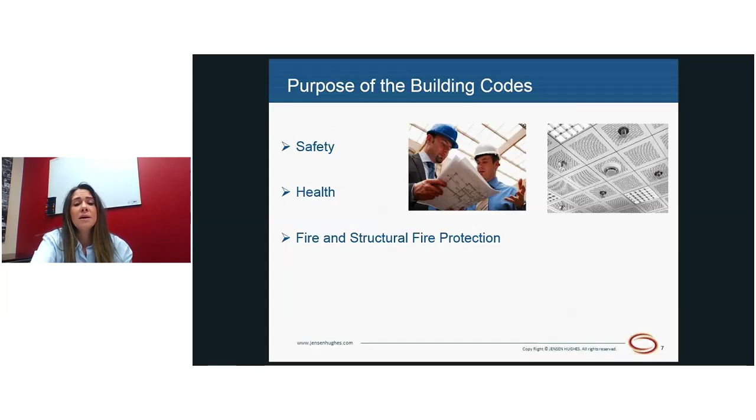Now, a little brief history of the building code. What is the purpose of a building code and why do we have it? Well, it allows us to build safe buildings, take into consideration the health of occupants within the buildings, as well as assist in the design of fire and structural safety and protection, as well as ensuring that the built environment is suitable for those with disabilities.

Now, a model code was desired to unify construction practices across Canada. Development of a national building code was first contemplated in Canada in the 1920s and abandoned due to the limited resources to complete the work. Originally, what Canada was doing, we were just using a number of codes that were derived from the United States.

However, an administrative committee formed in 1932, which was called the National Research Council of Canada, to actually develop the National Building Code. The development of the Canadian Model Code reinitiated in 1937. And in 1941, the first National Building Code was released. To date, we are on the 14th edition, which is now the 2015 National Building Code.

So, building code content. This seminar is going to mainly focus on Volume 1 of the 2015 National Building Code. I will be using the binder compendium, but there is also a book compendium. Throughout this, I will be referencing page numbers from the binder, which are also identical to that of the book version. So you will equally be able to follow along just as easily.

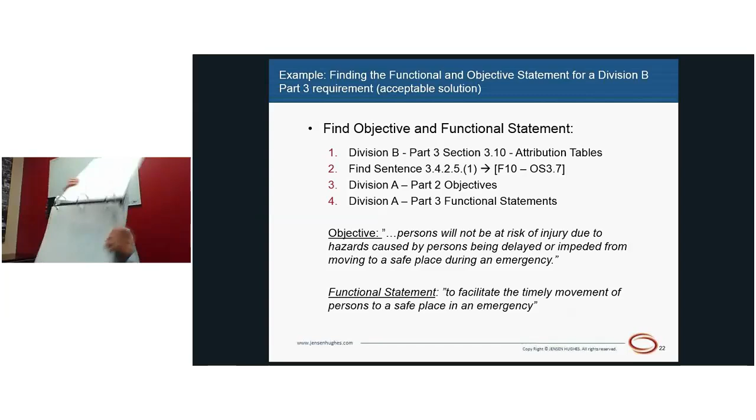Okay, so now we have our objective. We're going to flip to Part 3, just a couple pages over, to find our functional statement. This we can find on 3-2. Right at the top of the page, you will see a list of functional statements, one of those being F10, which reads: to facilitate the timely movement of persons to a safe place in an emergency.

Therefore, the intent of requirement 3.4.2.5.1 regarding travel distance is to ensure that people can make it to an exit facility in the event of an emergency in a timely manner, without being delayed or impeded.

So as a result, you're going to summarize that result and your testing and analysis criteria and data into a document and issue a statement stating that although you don't meet the literal application of the code, you do comply with the intent of the objective-based code. Therefore, this is deemed acceptable.

The results and documentation will be submitted to the AHJ and will await the acceptance or non-acceptance. Again, ultimately, you can do the same alternative solution over and over again. Sometimes it'll be accepted, sometimes it'll be rejected.

It is all up to the AHJ, so your authority having jurisdiction. It usually results in that person feeling that they're liable for that document or the repercussions of that document,

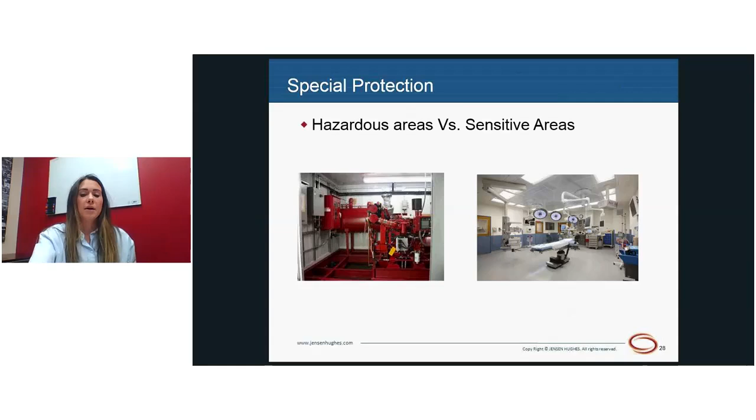We're going to look at special protection. What's the difference between hazardous areas, sensitive areas, when we're protecting people from the outside versus the inside? We're going to look at egress and exiting and what the difference between those two terms are.

We're going to be looking at interconnected floor spaces and mezzanines, as well as fire access routes and protection systems, high buildings and the additional safety measures applicable to high buildings. We're going to learn how to calculate occupant load and exit capacity and plumbing fixtures.

And then we're going to look at barrier-free design, which also includes the protection of floor areas and a barrier-free path of travel, otherwise known as areas of refuge. But first, we're going to look at a few definitions and concepts that are important as we move along.

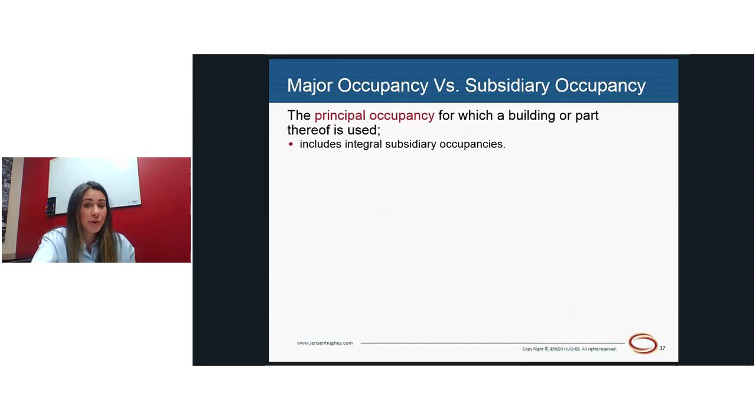So what is the difference between a major occupancy and a subsidiary occupancy? A major occupancy is the principal occupancy for which a building or part thereof is used. It can include smaller subsidiary occupancies.

So right now in this image, we have a 5-story Group C residential occupancy situated above one level of an F3 storage garage, otherwise known as a parkade. The storage garage is classified as a subsidiary occupancy to that of the overall Group C residential occupancy.

Now, if this parkade in the basement were to be open to the public and not just serving the residents above, it would become its own major occupancy as it's self-sufficient and doesn't rely on the major occupancy above.

Multiple major occupancies - that is where you can have multiple major occupancies within one floor area. You could have a Group E, a Group A2, and a Group B, but it all comes down to how we separate and compartmentalize those major occupancies within that floor level.

Multiple major occupancies can also be superimposed above one another. A few definitions that are quite important.

You need to know building height, which is the number of stories between the floor of the first story and the roof. What is the first story? That doesn't always mean it's the ground level. The definition of first story is the uppermost story having its floor level not more than 2 meters above grade. What is grade? Grade is the lowest of the average levels of finished ground adjoining each exterior wall of the building.

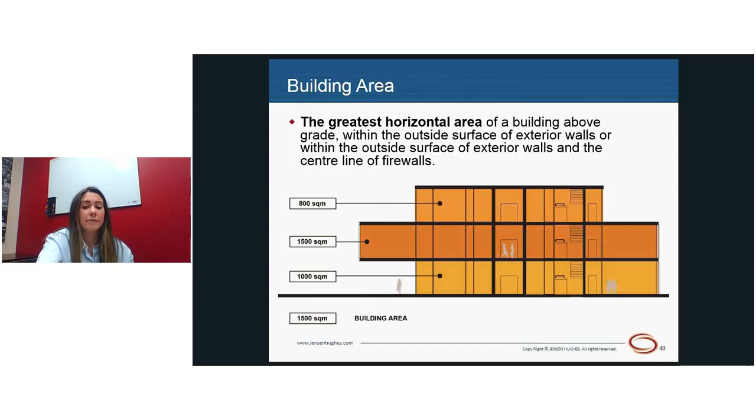As per the example below, you can see that the second story would be the one to designate as the overall building area. This image, again, is the first image, just simplified, in that the second floor area would be the determining factor for building area.

Now, I probably should have put this slide a little earlier, in that it does define the building classifications if you are unfamiliar with such terms. Now, building classifications are how you categorize the different types of buildings and their uses.

Any type of A occupancy is an assembly occupancy, and it serves the public. So whether that contains an arena, a performing arts theater, restaurants, or otherwise where occupancies can gather in an open air stadium, if you will.

Anything with a B is a detention occupancy, care and treatment occupancy, or a care occupancy. So B1, detention occupancy, is your jail establishment. Then you have B2, care and treatment, which would otherwise mean it's a hospital, somewhere that provides treatment to its patients or residents. And a B3 is a care occupancy.

So that means they might provide assistive living services, but they wouldn't provide treatment in-house. They would likely, in the event of an emergency, call an ambulance, and that ambulance would bring them then to a hospital where treatment could be provided.

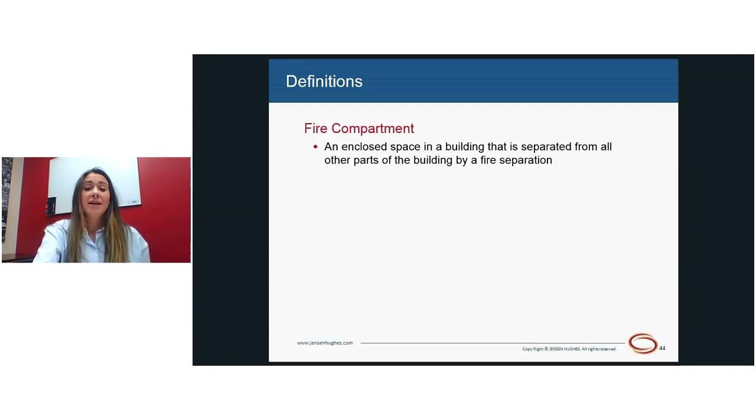Again, some more definitions which are important knowing for compartmentalization. What is a fire compartment? An enclosed space in a building that is separated from all other parts of the building by a fire separation. A fire separation is the construction assembly that acts as a barrier against the spread of smoke and fire.

Fire resistance rating: the time in minutes or hours that a material or assembly of materials will withstand the passage of heat and flame. Just because something has a fire resistance rating doesn't mean it has to be constructed as a fire separation.

Typically, the code's intent is to provide floor assemblies with fire separations that have a fire resistance rating. In a smaller building you'll have a lower fire resistance rating, and in a larger building a higher one. The reason is that the time allotted is based on how much time a firefighter or emergency personnel has within the building to get in and out before the floor assembly starts to disintegrate.

As a simple illustration, typically floor assemblies have a fire separation, and walls are fire separations when separating two compartments, whereas your supporting structure will just have a fire resistance rating. Sometimes, depending on your 3.2.2 article, you might have a waived fire resistance rating if your supporting structure is of non-combustible construction.

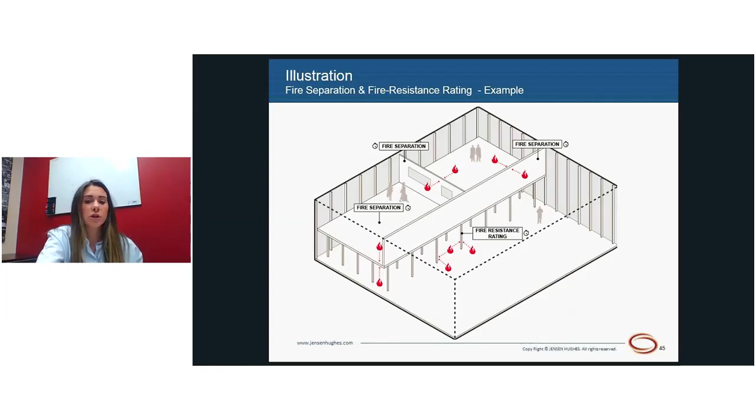Now we're going to vertically compartmentalize - floor assemblies, exit stair shafts, vertical shafts, elevators. There are factors that affect the degree to which a building is vertically compartmentalized. The major factors are: you need your major occupancy, you need to know your building area, and you need to know building height. With regards to firefighting and suppression, that's an added benefit.

Sometimes the client already knows if they want to sprinkler the building, which helps with insurance. Or if they don't know, you can use the three major criteria - major occupancy, building area, building height - find a 322 article, which will tell you whether or not you need the building to be sprinklered. The 322 article is found in subsection 322, Division B, Part 3 - 6th tab in your binder, or part 3 in your book.

Those will tell you all your construction requirements - whether you need combustible or non-combustible construction, whether you need to sprinkler the building or not, floor fire ratings, mezzanine fire ratings if applicable, roof fire ratings if applicable, and the fire resistance rating applicable to your structural components supporting those elements.

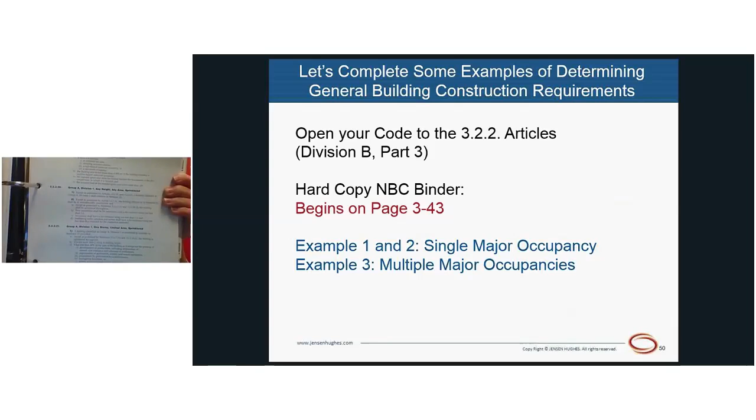Group A, Division 1, any height, any area, sprinklered - and those 322 articles lead you all the way to 32290 on page 3-68. So from page 43 to page 68, those are all your construction requirements for all types of major occupancies, ranging from assembly all the way to industrial hazard occupancies.

We're going to do two examples for a single major occupancy, then one large example of a multiple major occupancy, and then I've added one that you can do on your own.

So we have a single major occupancy, and the criteria is as follows: we have a Group C, the building area is 2,000 square meters, 5 stories in building height, and it is sprinklered.

The 322 article you're going to apply is 32248 - Group C, up to 6 stories, sprinklered. As you read through, you'll notice the building has to be of non-combustible construction. The floor assembly and supporting structure are permitted to have a 1-hour fire resistance rating.

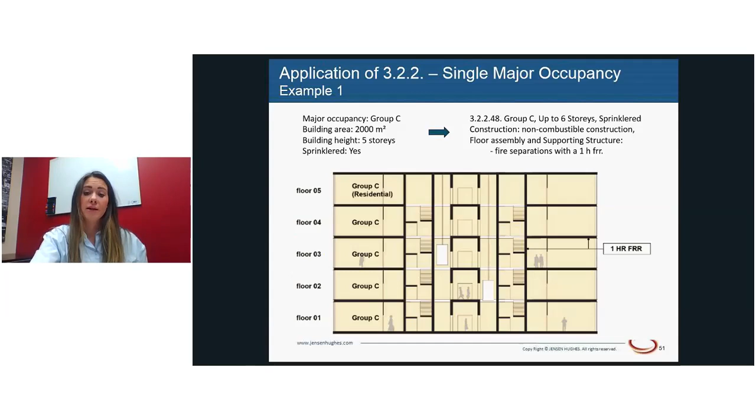Okay, so example 2. Our criteria is as follows: Group E, the building area is 1,500 square meters, building height 3 stories, it is sprinklered and faces one street.

So if we flip through, we're going to try and find our Group E requirements, and now we're just going to try and determine where that criteria falls in. You always want to go least restrictive to more restrictive.

In this case, the least restrictive 322 article is going to be 32267, Group E up to 3 stories sprinklered. Faces one street was just there to throw you off - typically you don't need that information unless your building's not sprinklered.

Anyways, the construction can be of combustible or non-combustible construction. The floor assemblies, no matter what, must be fire separations with a 45-minute fire resistance rating, whether combustible or non-combustible. However, your supporting structure may have a fire resistance rating of 45 minutes or be of non-combustible construction.

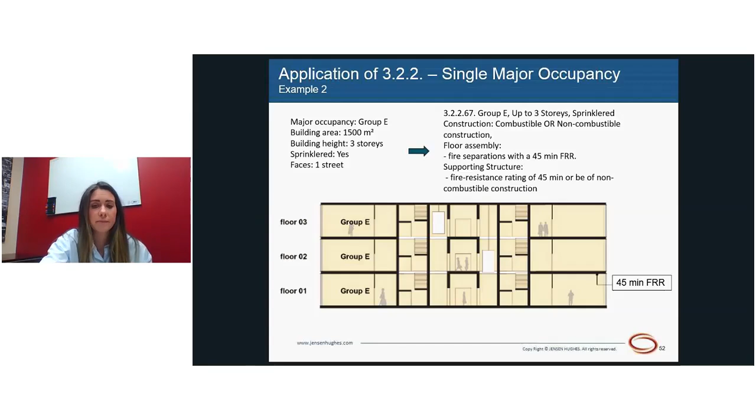Now we're going to do a multiple major occupancy example. If you look at articles 3225 to 3228, at the beginning of the 322 articles, it gives information on buildings with multiple major occupancies, superimposed major occupancies, and exceptions for major occupancies. In a building containing more than one major occupancy, the requirements of this subsection for the most restricted major occupancy contained shall apply to the whole building.

However, when you have superimposed major occupancies, where one major occupancy is located entirely above another, the requirements of this subsection for each portion of the building containing a major occupancy shall apply to that portion as if the entire building were of that major occupancy.

So this is just an exemplar for indicating superimposed major occupancies, in which case we could have a Group E, a D, a C, a B, an A — it doesn't matter. However, a lot of the time you want to put the more restrictive 322 article items

lower and then work your way up, so that you don't have all the restrictive requirements on the upper floor that then have to apply all the way down. You want the most restrictive requirements on the ground floor, and then as 322 article restrictions lessen, you can build up.

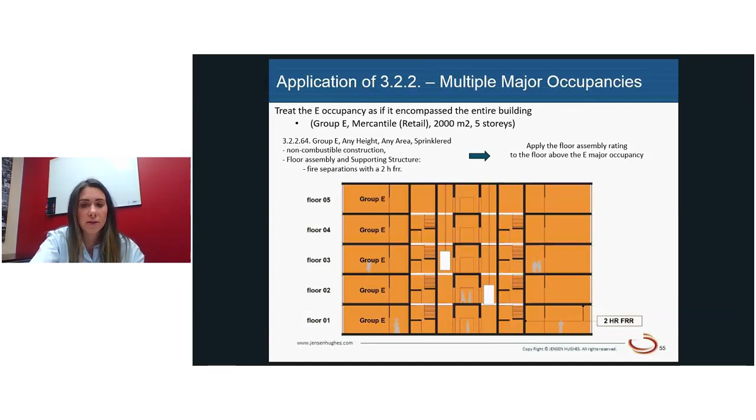Secondly, we're going to move on to floors 2 and 3, which consist of a Group B occupancy. So now we're going to treat the entire building as if it was that occupancy — 5 stories, 2,000 square meters, only containing that group.

You're going to flip to your 322 articles and find your item, in which case we come up with 32257, Group B, up to 6 stories and sprinklered.

That means your building is going to maintain non-combustible construction. Your floor assembly and supporting structure will have a 1-hour fire resistance rating. Like we did before, we're going to apply that floor assembly rating to the floor above the Group B major occupancy, creating more compartments separated from the remainder of the building. And it's always the floor above.

Now we're going to do the last 2 stories, which is Group C, stories 4 and 5. We're going to treat the entire building as a 5-story residential building and try to find the 322 article.

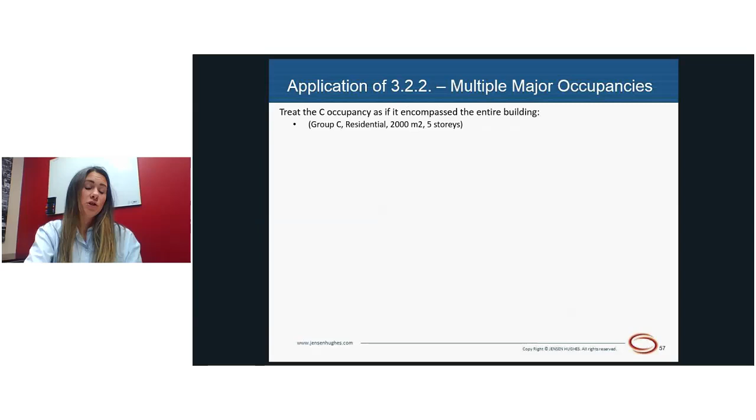In this case, we come up with 3.2.2.48, non-combustible construction, floor assemblies required to be of fire separation with 1 hour fire resistance ratings. Again, we want to apply that floor assembly rating to the floors above the Group C. Now you'll notice that the floor above the 4th floor is 1 hour, but we've applied

a 0 hour fire resistance rating to the roof. Why? Well, under 3.2.2.17 and 3.2.5.12, sentence 6, sprinklers are permitted to be used in lieu of a roof rating for assembly occupancies consisting of an arena, pool, or gymnasium. However, in the explanatory material of 3.2.5.12, sentence 6, through permission of the authority having jurisdiction, this could also be

used on alternate building occupancies. In real life applications, it is almost always accepted to waive the fire resistance rating of a roof if you have a sprinkler system, provided the rooftop is not an occupied space, not being used as an amenity, terrace, etc. Otherwise, per literal application of the code, the roof would require a 1 hour fire resistance rating.

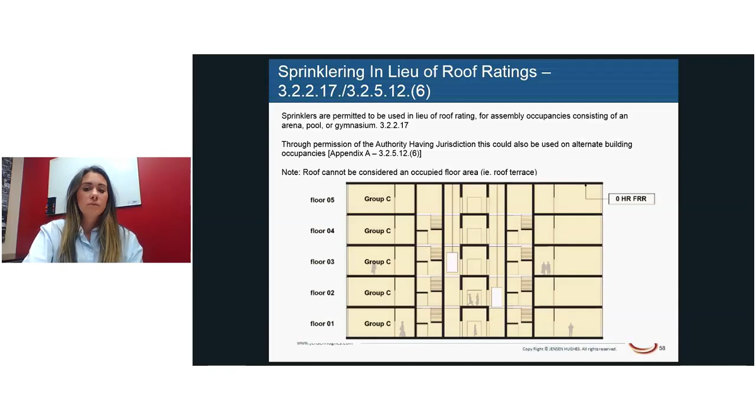Okay, so now when you put the whole thing together, we'll have the floor assembly above floor 1 having a 2 hour rating, and then all other floor assemblies will be 1 hour. Because the building is sprinklered, we assume the roof isn't being occupied or being used as a rooftop amenity space, but we can waive the fire resistance rating. That's it.

Now, once we've vertically compartmentalized, we can look at the exit shafts, the elevator shafts, and the service shafts, which are all based on your floor assembly rating. So in this case, say the entire building was classified as a Group E major occupancy. That means each floor assembly would have a 2 hour fire resistance rating.

If we look up exits, 3.4.4.1, I won't do all of them, but I'll go through 2 of them with you. So under 3.4.4.1, if I get there - fire resistance rating of exit separations, page 3-134. It says, every exit shall be separated from the remainder of the building by a fire separation having a fire resistance rating not less than that required by your subsection 3.2.2 article, but not less than 45 minutes.

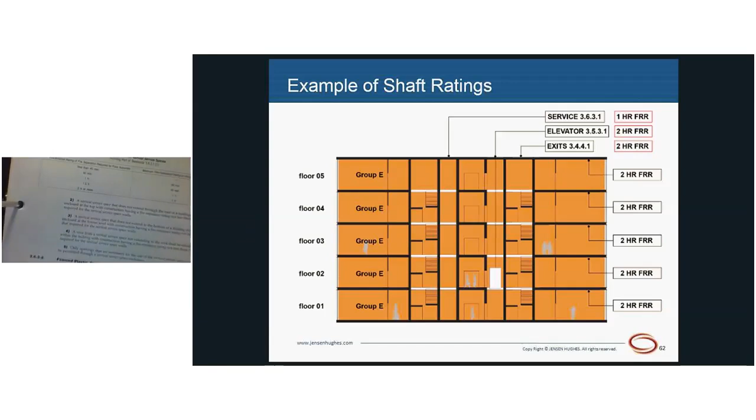And you'll notice fire resistance rating of fire separation required for the floor assembly, right there, you see 2 hours right at the bottom. You follow your hand over, and the minimum fire resistance rating of that vertical service space is required to be 1 hour. So you actually get a bit of a reduction there.

Now, something that comes up as a question quite often is that based on your 3.2.2 article, if you notice that the lower floors are not required to be sprinklered and the upper floor is required to be sprinklered, this would result in each of the floors below the sprinklered floor level having to be sprinklered as well.

Or say you had 1 hour, 1 hour, 1 hour, and then 2 hour floor fire separation, your exit stair shafts all the way down would also be 2 hours. Except that your floor assemblies could remain 1 hour, 1 hour. It's just that your 2 hour floor assembly must now be the same as your 2 hour exit stair shaft all the way down, because firefighters need to be able to come up, remain protected for that 2 hour period from the top level, which requires that more restricted fire resistance rating.

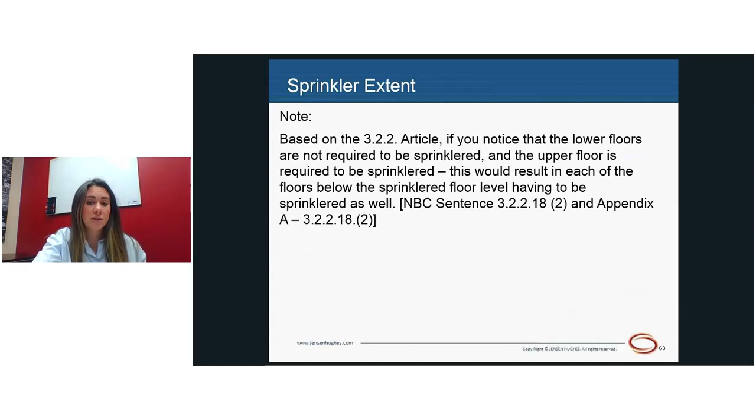It's a 3-story Group E office situated above 1 basement level below grade, otherwise known as a parkade, Group F3 occupancy. Now I'm going to go through the answers with you because there is an item that might throw you for a bit of a loop.

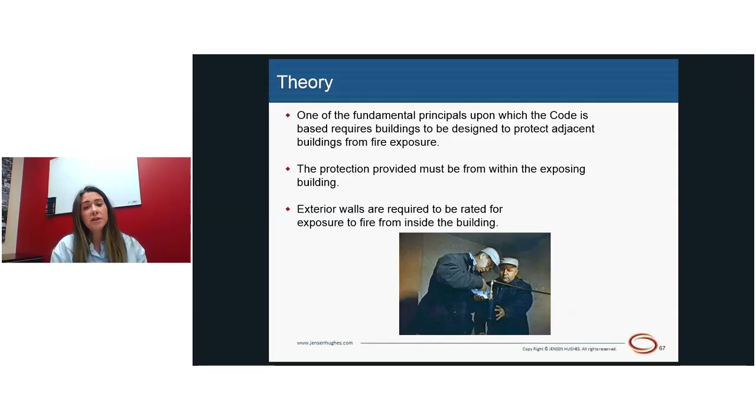So what is the theory behind spatial protection and exposure protection requirements? Well, one of the fundamental principles upon which the code is based requires buildings to be designed to protect adjacent buildings from fire exposure. The protection provided must be from within the exposing building. Exterior walls are required to be rated for exposure to fire from inside the building. So if a fire breaks out in one building, you need to make sure that it's not going to have an impact on adjacent properties.

The history behind this is that in 1958, the town of Aultsville, Ontario was permanently flooded as part of the creation of the St. Lawrence Seaway. After the town was abandoned, the vacant buildings were burned to study how a fire in one building affects the adjacent buildings. These fires are known as the St. Lawrence burns.

What is an unprotected opening? That is a doorway or a window or an opening, other than one equipped with a closure having a required fire protective rating, or any part of the wall that has a fire resistance rating less than required for the exposing building face. In other words, if you have a doorway, window, or opening that's not protected, that is considered an unprotected opening. If you have a closure, such as a fire shutter over an opening, that's no longer in your area of unprotected openings as it's protected by a closure.

The unprotected opening limit tables in subsection 323 are based on the results of the St. Lawrence burns. The maximum permitted unprotected openings can be determined on the basis of the following information: you need the occupancy classification, the exposing building face and the area of the fire compartment you're calculating, and you need to determine the limiting distance to a property line or the center line of a public thoroughfare.

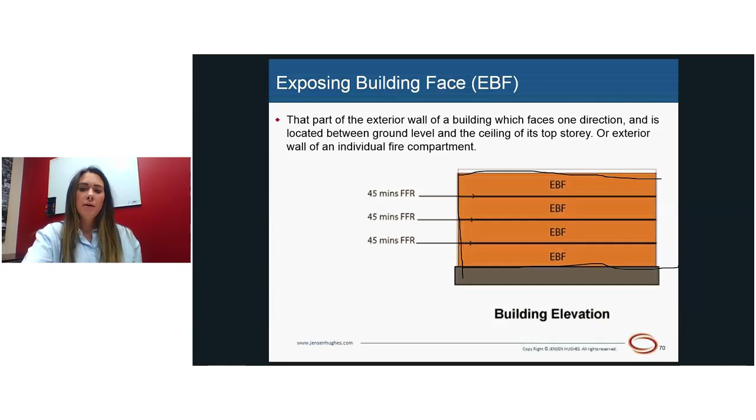So you have the option to either calculate exposing building face using... sorry, this isn't working, one second. You can either use the area of the entire exposing building face, okay? A beautiful square I just drew.

Or, where a building is divided into fire compartments with a minimum fire separation having a fire resistance rating not less than 45 minutes, then you can actually calculate the required percentage of unprotected openings per compartment. And that can actually help you have more unprotected openings in your overall exposing building face.

Now, the distance from an exposing building face to a property line can also be measured to the center line of a street, lane, or public thoroughfare, or an imaginary line between two buildings or fire compartments on the same property, measured at right angles to the exposing building face.

So if I have building Y and building X separated by a property line, you would measure from the closest portion of the exposing building face to the property line. And you would do the same thing for building X, closest portion of the building to the property line. And it's as easy as that.

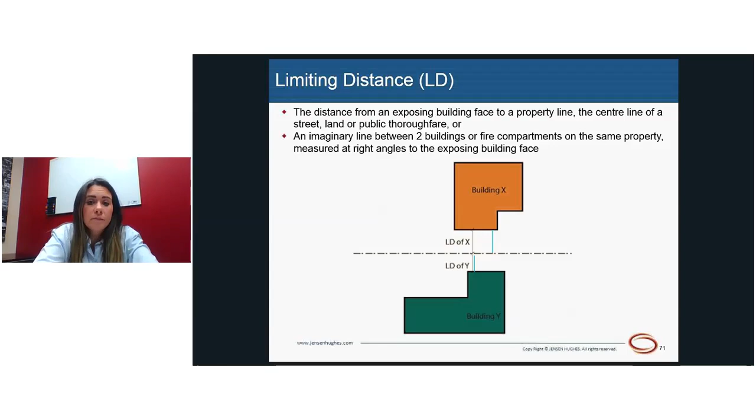Now, construction of exterior walls. Unprotected openings permitted or required construction of exterior building face can be determined based on separate limiting distance calculations. So, for instance, this yellow dotted line right here is what you would use to determine the fire resistance rating required of your exposing building face.

So this is one compartment, okay? So you would take the limiting distance from the closest face of that compartment to the property line, and that's going to be your limiting distance to determine the fire resistance rating of this compartment. You would take this dimension, okay, this dimension.

Depending on your municipality, some like you to measure from center line to center line, so center wall to center wall. Other municipalities prefer that you use from inside of compartment to inside of compartment. So it's always nice to ask who you're dealing with at the city as to what they prefer for your calculations, so that way you don't have to go back and redo them.

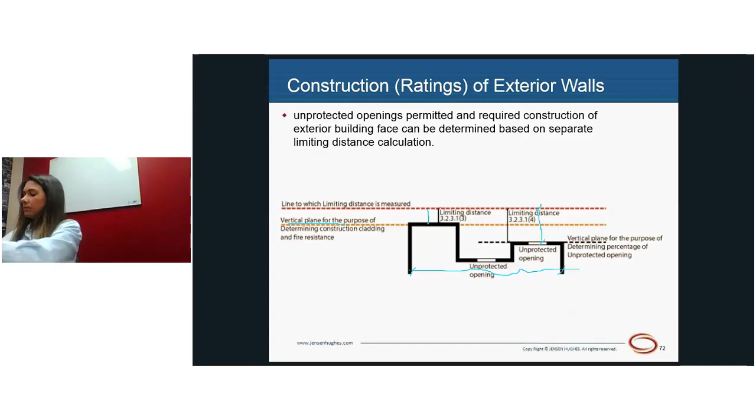So that is enough criteria to get you going on how to determine your exposing building face construction as well as your percentage of unprotected openings. Because the building's sprinklered, that immediately means you get to look at either table 3231B or table 3231E, on page 3-75. You'll notice in the first line of the table, it will tell you what occupancies each table applies to. So table 3231B applies to unprotected openings for group A, B, C, D, and F3 occupancies.

As we stated, the criteria for the building we're working on, it's an F2, so we're not going to be using 3231B. We're going to be moving down to table 3231E, which applies to groups E, F1, and F2 buildings. Now we have a 90 square meter exposing building face, so we're in between the 80 and 100 mark. And then we have a limiting distance of 4.5 meters, which is in between the 4 and the 5. So we are going to have to do some interpolating.

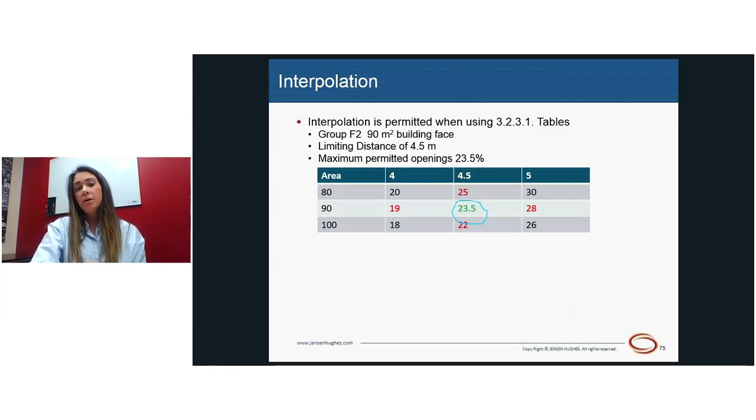If you look at 3.2.3.10.2, it permits 100% unprotected openings where the limiting distance is 9 meters, regardless of occupancy classification or sprinklering. If you look at tables 3.2.3.1D and 3.2.3.1E, you'll notice that as your limiting distance grows larger, you're permitted almost 100% unprotected openings. For group A, B, C, D, and F3 occupancies, any limiting distance beyond 9 meters permits 100% unprotected openings. For group E, F1, and F2 occupancies, anything past 15 meters is essentially permitted 100% unprotected openings.

But in this 3.2.3.10 sentence 2 item, if you're on the ground floor level and you have a limiting distance of 9 meters, you're permitted 100% unprotected openings no matter what. It actually reads: the exposing building face of a story that faces a street and is at the same level as the street is permitted to have unlimited unprotected openings if the limiting distance is not less than 9 meters. So yes, that's correct. It's typically the ground floor level or the floor level that opens onto the street that's permitted 100% unprotected openings.

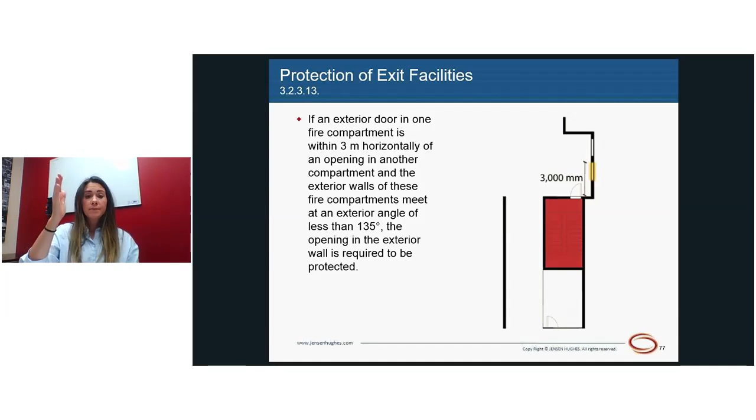What about protection of exit facilities? When you have an exit leading outside, and there's an opening located within 3 meters of that exit, and that opening in the adjacent wall meets at an exterior angle of less than 135 degrees, the opening in the exterior wall has to be protected. Because if you're exiting a building and there's a fire in the adjacent compartment, an opening within 3 meters could impact individuals trying to escape the building safely. Therefore, that window within 3 meters is going to be protected.

How do you protect an opening? You can use glass block, wired glass, or a fire shutter. The NBC does not have a literal requirement regarding a sprinkler protected glazed wall assembly. However, you could use it, but you may require an alternative solution or variance approved first by your authority having jurisdiction. If you're working on projects in Ontario, the Ontario Building Code has Article 3.1.8.18, which speaks to the requirements of a sprinkler protected glazed wall assembly, which is permitted. However, in other provinces or under the National Building Code, you would require a variance or alternative solution to use a sprinkler glazed wall assembly.

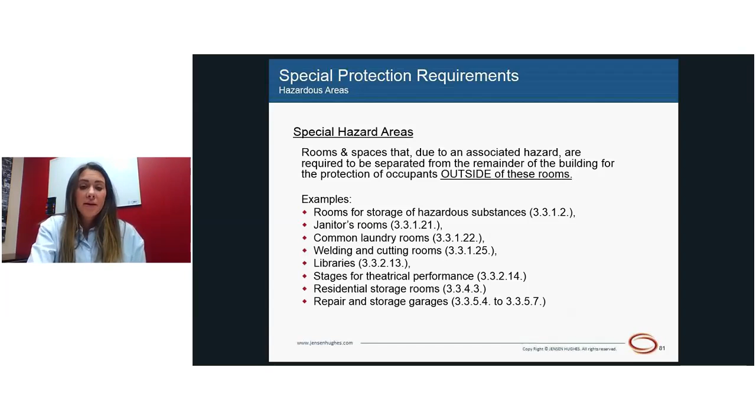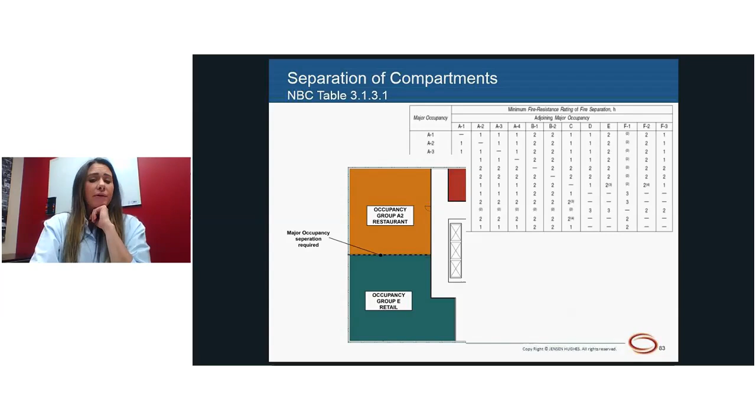Separation of compartments. A great table to use if you're ever trying to determine the fire separation between major occupancy is NBC table 3.1.3.1. For example, if you have a restaurant located next to their neighbor, which is a retail space, you go to this table, look at A2E, and you'll realize that the fire separation separating these two compartments must be not less than 2 hours.

Let's do another example. We have a floor area with multiple office spaces within it. You look at your table 3.1.3.1, B, and you need nothing. Essentially, no fire separation required.

This is also confirmed under section 3.3, where all your horizontal compartmentalization requirements are found. In sentence 3.3.1.1, it confirms that group B occupancies placed side by side are not required to be separated from each other by a fire separation or having a fire resistance rating. You can just have plain drywall, partition walls, not smoke sealed, nothing.

Public corridors. A lot of the requirements you can find in 3.3.1.9. They are required to be 1100 millimeters wide, provide access to 2 exits in 2 separate directions, permitted to have 100 millimeter obstructions on either side, and dead-end corridors are not permitted to exceed 6 meters unless located entirely within a suite.

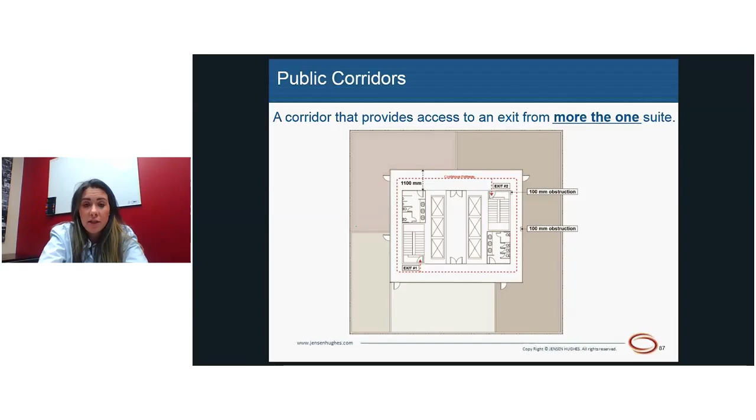Corridors used by the public can serve one tenant. Why would one tenant have a corridor used by the public when they can just access and exit directly? Typically, a client or an owner wants this option because it provides security, so anyone coming up through the elevator lobby doesn't just wander right into their office space, or if they don't meet travel distance to an exit from within their space. I'm going to get into how you apply that requirement and where it's found in the next few slides.

If we go to 3.3.1.9, sentence 7, a dead-end corridor is permitted provided it is not more than 6 meters long. Right then and there, not permitted. However, if that dead end was less than 6 meters, it would be permitted.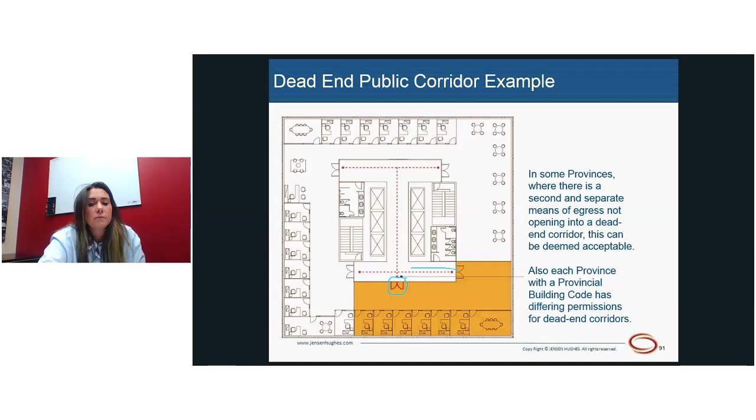Public corridors. Section 3.3.1.4—this is where you find all of your public corridor fire separations. We'll start with sentence 1, the generic requirement, which reads: a public corridor shall be separated from the remainder of the story by a fire separation having a 45-minute fire resistance rating.

So a public corridor constructed has a 45-minute fire resistance rating. Pretend this is a high-rise office building, in which case the exit stairs and elevator shafts would have to be separated from the remainder of the floor area by a 2-hour fire resistance rating no matter what, as we learned from our 3.2.2 articles on vertical compartmentalization. But for public corridors within the horizontal floor area, we require a minimum 45-minute fire resistance rating.

Hold on, we are getting to those exceptions in a second. Where the entire floor is sprinklered, public corridors do not require a fire resistance rating. This is mentioned in sentence 3: if a story is sprinklered throughout, no fire resistance rating is required for fire separation between a public corridor and the remainder of the story, provided the corridor does not serve a care, treatment, or detention occupancy, or a residential occupancy.

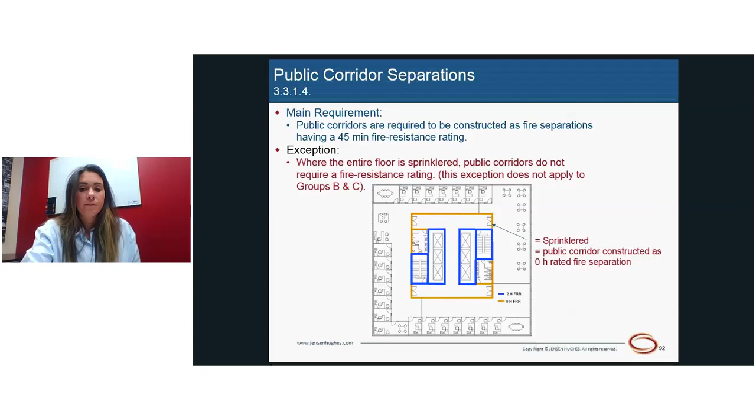Then we get into our exceptions listed in sentence 4. This one's the fun one. Where the entire floor is sprinklered and travel distance from all points of the floor to an exit is less than 45 meters, the public corridor does not require a fire separation. So if you comply with travel distance and your building is sprinklered, your public corridor can now just consist of a simple partition wall, no fire separation, no fire resistance rating. But again, your stairs and elevator shafts would still maintain their fire resistance and fire separation from the remainder of the building.

There's also another exception allocated in 4(c) that just states if you have base building washrooms, or washrooms facing the public corridor, they don't need to be separated from the corridor, provided the remainder of the corridor is separated from the remainder of the floor.

Okay, now we're going to move into egress and exiting. What's the difference? The easiest way to explain this is that an egress door provides access to an exit from a floor area. We're not yet outside the building, not yet in a safe haven away from the fire. We're still within the building, but en route to an exit.

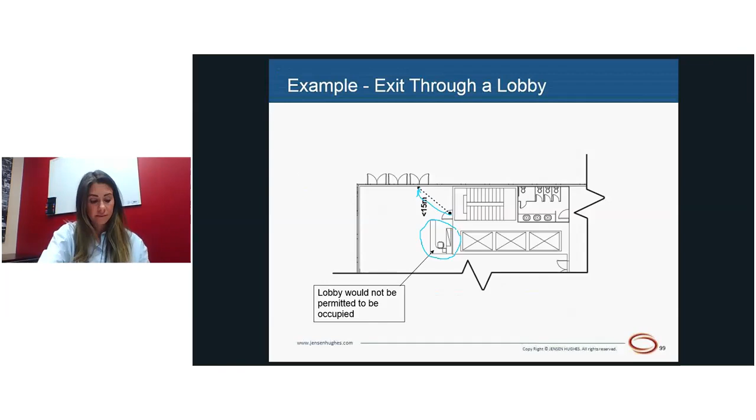Doors and door hardware. So doors are required to have a clear opening width depending on what occupancy they serve. Doors serving a room or suite having more than 60 people are required to swing in the direction of exit travel. They are not required to swing in the direction of exit travel if your occupant load is less than 60. Panic hardware required where doors serve an assembly occupancy with an occupant load more than 100.

Sliding doors must have a breakaway feature when opening into a public corridor or used as an egress door in an access to exit. A question came up as to what breakaway feature was, and I'm just going to refer you to the actual requirement and read it to you. So requirements for doors are actually found in 3.3 as part of a means of egress.

And it reads, under 3.3.1.12 sliding doors, at the bottom of page 3.109, it states that a sliding door provided in locations described in 3.3.1.11, so serving rooms or suites with more than 60 people or larger occupant loads or opening into a public corridor, etc., must be designed and installed to swing on the vertical axis in the direction of travel to the exit when pressure is applied, and be identified as a swinging door by means of a label or decal affixed to it.

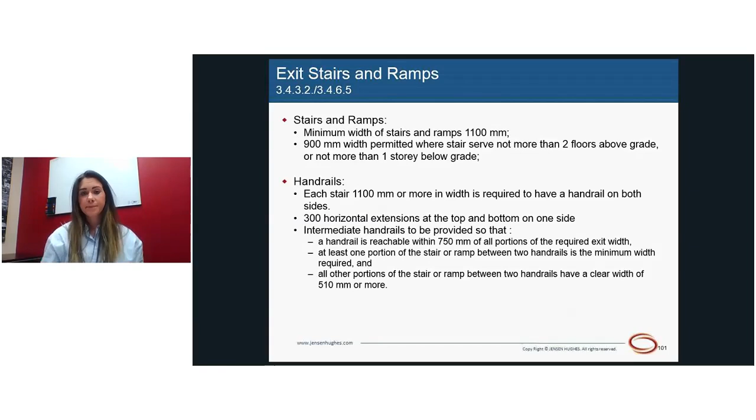Guards are required along stairs and ramps. If you don't have walls supporting either side, or walls that are at least 1070 millimeters high, you will require a guard or other barrier that is 1070 millimeters high that extends along the entire stairway and landing.

It used to be that guards could actually be lowered to suit the height of a handrail along a stairway. But as of the 2015 NBC, guards now have to be at least 1070 millimeters high along the entire stairway and the entire landing.

Now guards must make sure that a sphere having a diameter more than 100 millimeters can't pass through. A lot of the time you just space picket the 100 millimeters on center to ensure that the 100 millimeter diameter sphere can't pass through.

Now, they also cannot facilitate climbing, so the only horizontal components you can have within a guard are going to be less than 140 millimeters from the finished floor level, stair surface, or ramp surface, or 900 millimeters above the finished floor level, ramp, or stair surface.

Stairs have specific requirements for rise and run, and that can all be found in Article 3.4.6.8. When constructed, you can have up to 5 to 10 millimeters in construction tolerances.

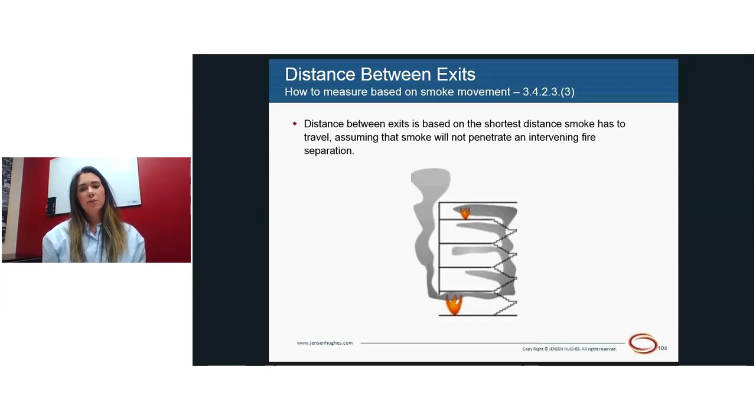Now we're going to move into distance between exits. Distance between exits is based on the shortest distance smoke has to travel, assuming that smoke will not penetrate an intervening fire separation.

So if we move to 3423, which is found at the bottom of page 3130, there's 4 sentences. So there's a couple options on designing for distance between exits.

We're going to start with 1A and B. 1A is that if you have a public corridor, the distance between exits is required to be at least 9 meters when served by a public corridor. In which case, if I did the diagonal dimension of this floor, say it was 20 meters, divided by 2, I got 10 meters, then the distance between exits could be 9 meters. So it could be reduced by a meter, if you will.

However, if you were to take the maximum diagonal dimension, which was like 8 meters, very small, divided by 2, gets you 4 meters. Those exits still can't be spaced apart any less than 9 meters.

As for B, if a floor area does not have a public corridor, then you need to take the maximum dimension of the floor area and divide it by 2, and the result of that is going to be your distance between your exits. Now, we elaborated a little bit in this image in that the smoke travel was measured around tables, etc.

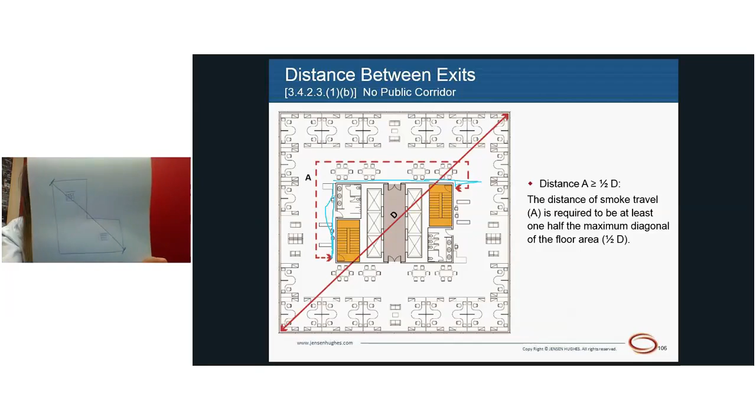So, say we have a floor area that's L-shaped, no public corridor. Distance between exits, how do you measure? You would measure from the furthest corner to the opposing furthest corner, whether or not that distance leaves the building. You would then divide that by 2, and that is the distance these exits would need to be spaced apart. If there was a public corridor joining these 2 exits, it would just have to be spaced such that the distance is not less than 9 meters per sentence 1A.

There was a new one that came into play, which is sentence 4. The distance between 2 exterior discharges of exit stairs serving the same floor shall be not less than 9 meters apart, or not less than 6 meters apart if the building is sprinklered, and the 2 exterior discharges are located within 15 meters of a street. In this case, say I have an office building, a residential building, any type of building, and sometimes what architects will do is have exit stairs placed in close proximity, or not in close proximity, but then route them to exit side by side out the side of a building. Based on this new requirement, such a design would no longer be permitted, because the distance between the 2 exterior discharges would have to be greater than 9 meters or greater than 6 meters, depending on those conditions.

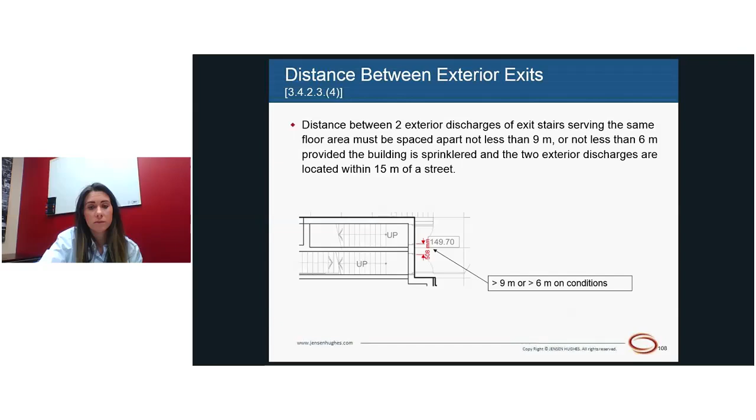Travel distance. The travel distance requirements, I believe, on the next page, 3-131, are outlined in 3424 and 3425. The distance from any point in a floor area to an exit is measured along the path of exit travel.

So, a sprinklered floor area is subject to a travel distance of 45 meters. High hazard industrial occupancy is limited to 25 meters to an exit. A group D that's not sprinklered is reduced from 45 to 40 meters. Other unsprinklered occupancies are limited to 30 meters. However, a storage garage conforming to 32290, which I believe is an open air storage garage, can have a maximum travel distance of 60 meters.

So how do you measure travel distance? I typically will only measure travel distance in a building code review if I'm provided with a furniture or equipment layout plan. That's because then I can measure travel distance around the furniture to an exit to determine whether or not the travel distance is actually going to comply.

If a client provides you with a drawing that has no furniture or equipment layout, then you have to measure the most restrictive travel distance, which is around walls, hugging walls, within almost a meter of them. In which case, you can extend your travel distance quite quickly by doing that. So you'd essentially be telling the client that they don't comply with travel distance, when in fact, once they have their furniture and equipment layout, they could comply. It is just very helpful to have that criteria on the plan already versus backtracking.

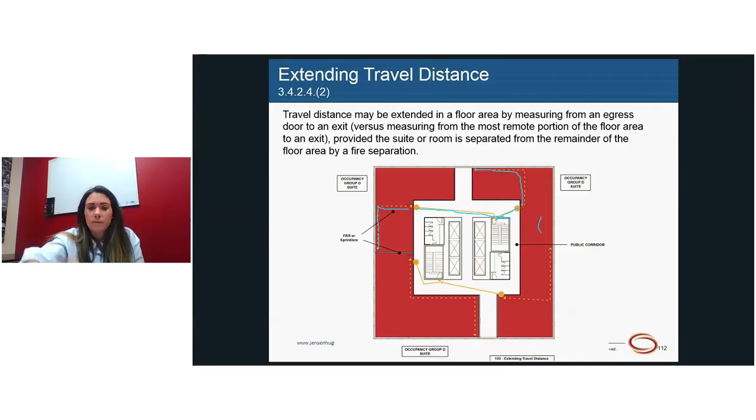Alternatives to travel distance. So you don't have to comply with the requirements of 3.4.2.5.1, provided exits are spaced along the perimeter of the building not more than 60 meters apart, and that each main aisle within the facility leads directly to an exit.

Okay, so you're almost creating a grid-like system. All main aisles, primary aisle width, primary exit paths of travel, align with an exterior door placed not more than 60 meters apart from each other.

A lot of the time, this type of travel distance is met in large industrial buildings or large storage buildings, sometimes even large retail stores like Walmart. What they'll do is provide a grid-like system, so whenever you're on a main pathway, it will lead directly to an exit door. Because from within the middle of those buildings, sometimes they're so large that you cannot make it to an exit within 45 meters.

So egress from suite. Now we've talked about exiting, minimum number of exits, distance between exits. Now we're going to do the requirements for the minimum number of egress doors from a suite or room. Provided all the following conditions are met, a suite is permitted to be served by a single egress door if the area of the suite does not exceed table 3.3.1.5.A and B.

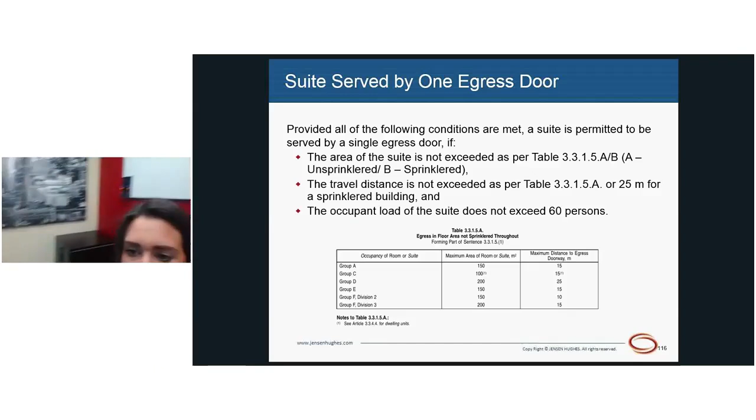So I am right now sitting in a meeting room. Okay? I'll give you a little tour. Right? To my left is a single egress doorway. Okay?

This meeting room is not sprinklered. I'm in a little industrial building. I'm a group D, less than 200 square meters, less than 25 meters to that single point of egress, and less than 60 people. I think there's only enough chairs in here for 10 people. Which means this room I'm in is served by an adequate number of means of egress.

It also swings inward, which is permitted because the occupant load is less than 60 people. Okay, let's do some more examples.

Is this suite permitted to be served by a single means of egress? So we've got a travel distance that's less than 25 meters, actual 15. The group D office, not sprinklered, 150 square meters, there's only 16 people.

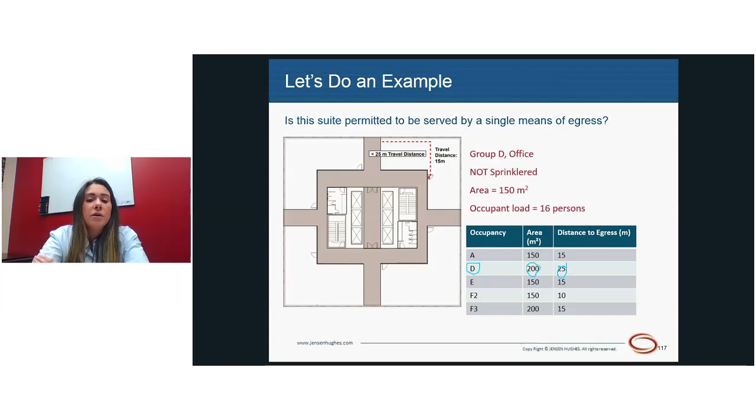Again, group D, we're less than 200, 15-meter travel distance, which is less than 25. Therefore, a single egress door is permitted.

Two means of egress: a suite is required to be served by at least 2 means of egress if the suite consists of an F1 occupancy, so your high hazard industrial occupancy, and the occupant load exceeds 60 persons. For an unsprinklered building, the area of the suite or the travel distance exceeds that of 3315A. For a sprinklered building, the travel distance exceeds 25 meters, or the area as allocated in 3315B.

So we've got an example here. We have a travel distance that's greater than 25 meters, actual 35, to any egress door. Group D office, sprinklered, 150 square meters, and there's 50 people in the space.

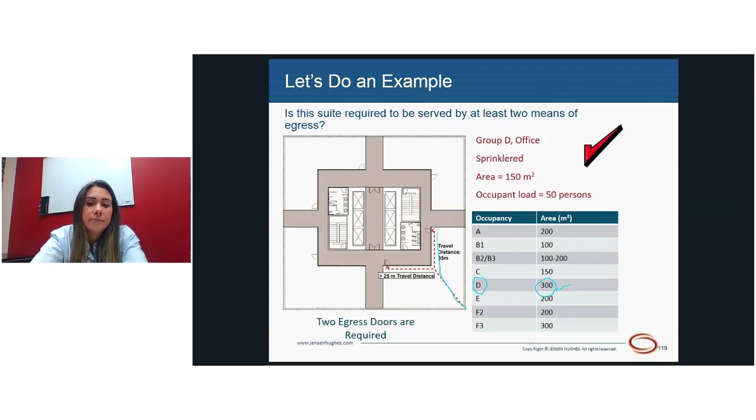So we look at 3315B. We've got a D occupancy. We are less than 300 square meters. We are less than 60 people, but we have a travel distance of 35 meters to one of the 2 means of egress. Therefore, 2 means of egress are required. So just to reiterate...

Say we have a sprinklered building, group D, single egress. Here are the options. We need 25 meters to the single means of egress from within the room or suite. But we also need an overall 45-meter travel distance to an exit.

Now, if the suite is separated from the corridor, you can measure 25 meters to the egress door and an additional 45 meters starting from the egress door to the exit. If there were 2 means of egress, you could have 45 meters measured to the single egress door, and then 45 meters re-begin at the egress door and end at the exit stair door.

So we've talked about distance between exits, and we've been talking about egress doors. So now it would only be fair to discuss distance between egress doors. When you have a room or suite required to be served by two means of egress, those two means of egress need to be separated by 1/3 the maximum diagonal dimension of the suite.

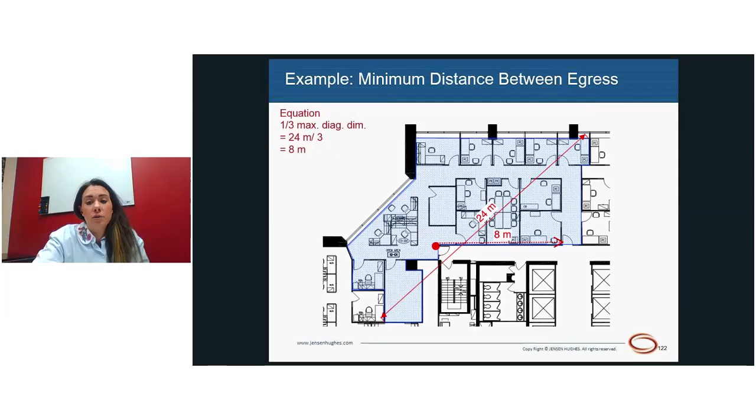What happens if the doors are spaced closer than 8 meters apart? What we typically do is construct walls of 0-hour rated fire separation so that the egress doors are separated such that smoke will travel around the walls constructed as smoke separations to achieve the distance between the two egress. A lot of the time this becomes apparent and required when you have a large suite at the end of a corridor in a corner unit with two egress doors, one on this side and one on this side. So you'll actually create a fire separation along walls between those two doors.

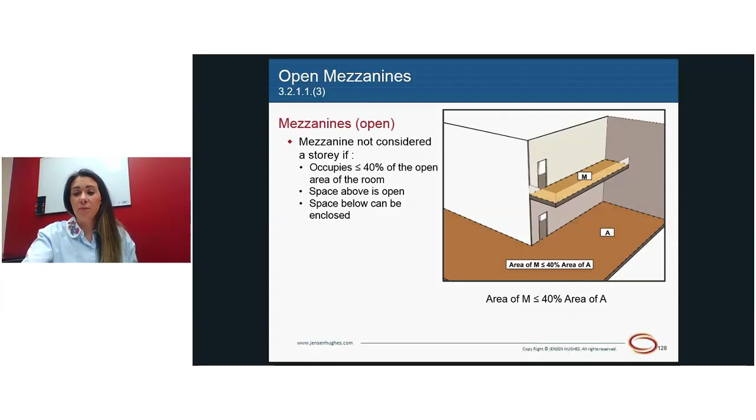The open option is discussed in 3211, sentence 3. In that, a mezzanine is permitted to remain open provided it occupies less than or equal to 40% of the open area of the room in which it's located. The space above remains open, but spaces below it can be enclosed. Once you enclose areas below the mezzanine, you have to subtract that from the open area of the room in which it's located, because the 40% has to be the open area of the room. So any enclosed rooms within that floor area must be subtracted because it's not the open area of the room.

So now, an enclosed mezzanine - if you don't comply with the requirements of an open mezzanine, we move into sentence 4. This permits you to have an enclosed mezzanine. However, it can't be more than 10% of the floor area of the story in which it's located, so you don't have to reduce those enclosed areas as you would for a 40% open mezzanine. The space can be fully enclosed and there's no requirement for visual communication.

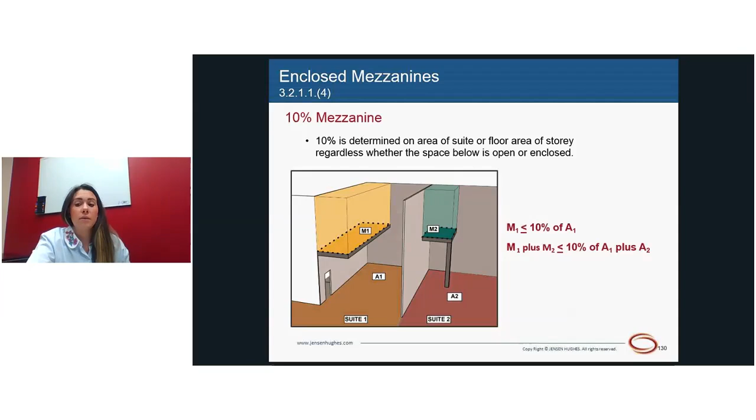Okay, so this is the same thing, but a second example of an enclosed mezzanine. Again, you can have one mezzanine that's enclosed, which is less than 10% of the floor area of the story in which it is located. However, if that floor area or story is divided into rooms and suites, and you want additional enclosed mezzanines, each mezzanine within a room or suite is not permitted to be greater than 10% of the floor area of the room or suite in which it's located. And the aggregate area - so if you have multiples, now I have two - the aggregate area of these two combined must be not more than 10% of the total floor area of the story in which it's located.

And then there's a third option, which is covered under 3.2.2 or 3.2.1.1, sentence 7. So we can go back to the option we discussed at number 1 with an open mezzanine, the 40% open mezzanine. However, on that 40% open mezzanine, I can have a 10% enclosure, which is not more than 10% of the floor area in which it's open to. So we have a 40% mezzanine - 40% of the open area in which it's located - and then on top of that 40% mezzanine, we can enclose a portion which is not more than 10% of the floor area or the open floor area in which it's located. You're not going to have 40% and then another 10% to make 50 - that's not the case. It has to be within the 40% open mezzanine.

However, here in Alberta, Calgary, the city has a very weird interpretation in that the enclosure can only be 10% of the size of the 40% mezzanine. That's not the case. The literal application of the code states that you have a 40% mezzanine, which is 40% of the open area of the room in which it's located, and then on that 40% mezzanine, you can have an enclosure that is not more than 10% of the open area of the room in which it's located.

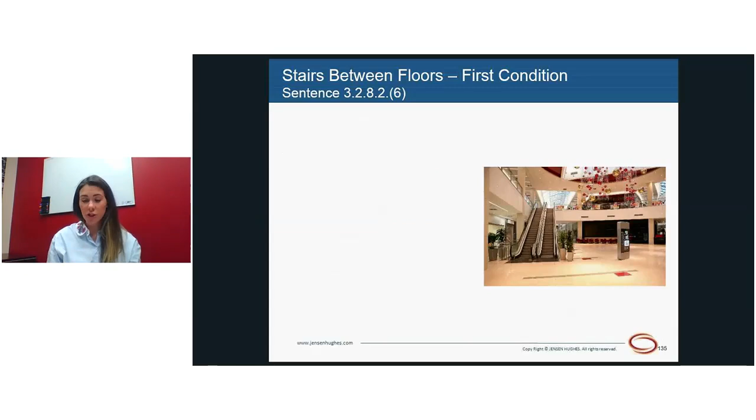From there, we get into the requirements of interconnected floor spaces. I'll be on page 3-103, and right now we're going to look at the first two conditions, which are discussed in items 5 and 6.

So the first condition is that you can have an interconnected floor space between the first story, remember the definition of a first story, and the second story above, or the first story and the story below, like the basement level. However, you can't have all three of them. Otherwise, that's non-conforming, and you would have to comply with the remainder of the requirements in 3283 to 3288, and those are not fun to comply with.

In order to comply with this first condition, so first story, second story, or first story and the story below, the IFS opening can only be used for stairs, escalators, moving walks, or just be like an open atrium. The presence of stairs is not required provided the building is sprinklered. The IFS has to be sprinklered throughout, and it contains an A, D, E, F2, F3 major occupancy. So an interconnected floor space conforming to this first condition would not be permitted in a group C or B occupancy, so a residence or a care facility.

Now you get into the second condition, which is outlined in sentence 5. Any number of stories can be connected by open stairs, like a convenience stair, an escalator, or moving walkway, provided the following conditions are met.

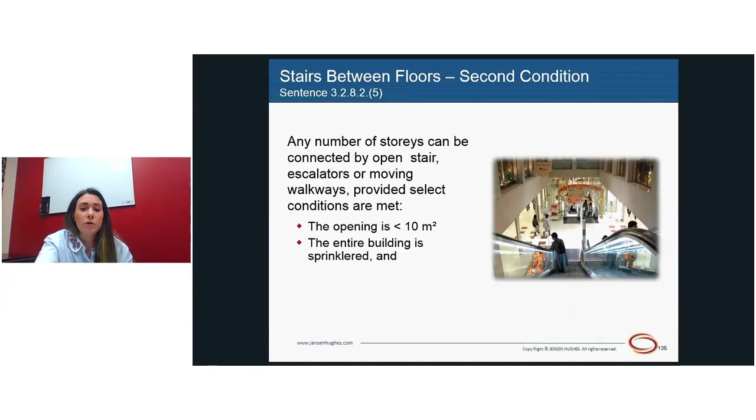The opening for the convenience stair, escalator, or moving walk is not greater than 10 square meters. So if you look at this image, that opening for the escalator is not going to be greater than 10 square meters. The entire building is sprinklered, and it can only be used in an assembly, office, or mercantile establishment. So you could not use this to interconnect multiple stories with a convenience stair in a residential building, a care occupancy, or any of your hazard industrial occupancies.

So all floor assemblies of floor areas or mezzanines must terminate at an exterior wall, a vertical fire separation, or a shaft of some sort. If not, they have to be protected against smoke, flame, and heat movement as per the items in 3283 to 3288. Now, these requirements just stipulate that the building needs to be sprinklered throughout.

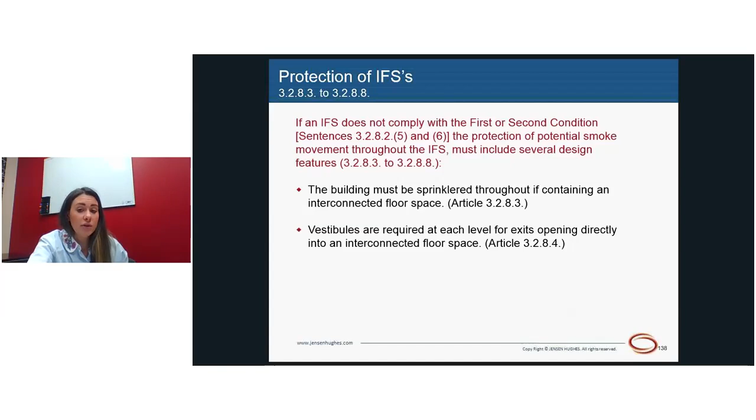If you can't conform to the first and second condition, you would need vestibules at each level for exits opening directly into an interconnected floor space, or to protect the elevator door openings in the interconnected floor space, or the elevator door opening into stories above the interconnected floor space. So you would actually incorporate these vestibules to almost separate your interconnected floor space from the protected area that allows individuals to exit the building.

This protected floor area is used to ensure that people are safe and out of harm's way from the interconnected floor space that might be filled with smoke in the event of an emergency because of the interconnected floor spaces. But in this case, because of the vestibules and the fire separation between the two, we are allowing for safe exiting from the floor area without having to travel through the interconnected floor space.

Interconnected floor spaces are also required to be accompanied by draft stops, which surround the openings and can't be less than 500 millimeters deep, measured from ceiling level down to the underside of the draft stop.

Typically, draft stops also have to comply with NFPA 14, or NFPA 13 sorry, the sprinkler one, in that you also need closely spaced sprinklers adjacent to the draft stops, and that will create a water curtain effect so that the smoke can't travel from one floor to the other. In NFPA 13, though, it does discuss...

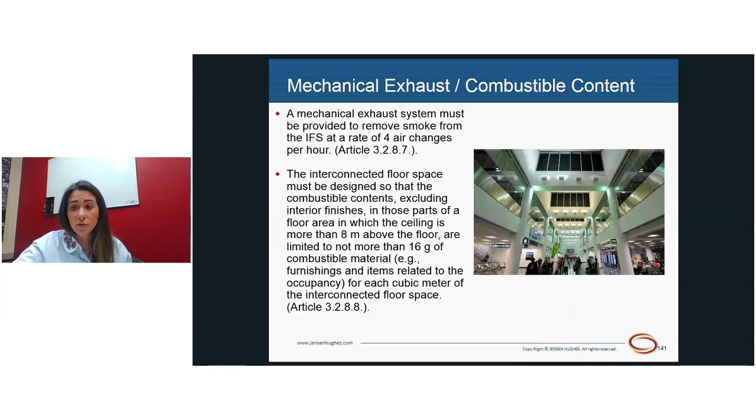In the past, we've done computer modeling that included analyses for passive air systems, mechanical extraction, smoke extraction systems, as well as fire shutters, fire curtains, to separate floors from the interconnected floor space in the event of an emergency. And in a number of cases, those alternative solutions have been accepted to omit buildings from having to comply with 3283 to 3288, which can have a serious effect on the architectural aesthetics that are trying to be achieved of a building.

Now we're going to get into fire alarm and provisions for firefighting. So you can flip to 324 and 325. Under 324, it'll tell you where a fire alarm system is required and when it is required.

When it is required, if your building's sprinklered, it's an easy yes, I need a fire alarm system. Otherwise, if you're a non-sprinklered building, there's a number of scenarios where you would require a fire alarm system, such as if you're more than a 3-story building, you have more than 300 people, you're a restaurant and you have more than 150 people. Otherwise, all of these are outlined in NBC 3241, which can be easily identified to determine whether or not your building needs a fire alarm system.

Now, there's two types of fire alarm systems: a one-stage and a two-stage. A one-stage can be used in all buildings, or in B3 occupancy, care occupancy, less than 3 stories in building height. A two-stage fire alarm system can also be integrated into all buildings, but is required in all B occupancies, with the exception of B3 occupancies less than 3 stories.

So the difference between the two is that a one-stage fire alarm sends an alarm signal to an audible device in the system immediately and encompasses the entire building. So once a pull station is pulled, a fire alarm will go off and everyone will evacuate the building. Very simple system. Whereas a two-stage fire alarm system will emit an alert signal so that someone can go investigate that zone to see whether or not it's a false alarm.

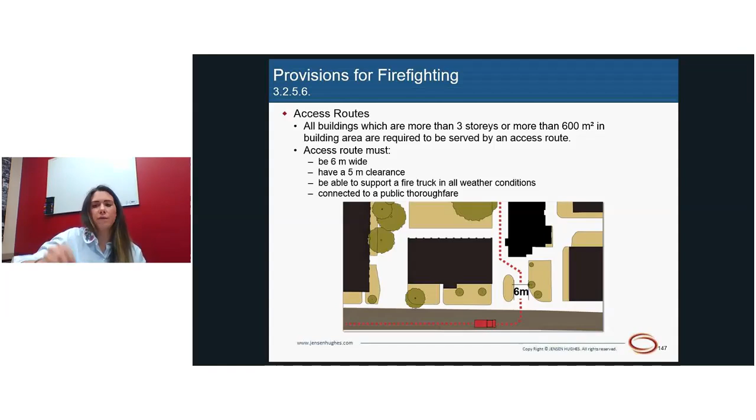Then you get into 32210 and 3255, which address sprinklering requirements for the building. You need one access if it's sprinklered, and then you need access to 1 to 3 streets if you're not sprinklered. Where can you determine how many streets? That is also addressed in 32210, or your 322 article that we learned how to use earlier on in this webinar.

Now, a standpipe system, and those requirements are outlined in 3258 to 32511, same section that we're in. A standpipe system is required in a building more than 3 stories in building height, or where the ceiling of the top story is more than 14 meters above grade, or where the building area exceeds those specified in table 3258. Now, the standpipe design must comply with the code, but it also must be designed in conformance with NFPA 14.

So hose connections are required to be provided to firefighters and are permitted to be located within exit stairs along with the risers. You would not require fire hose connections within floor areas where the building is sprinklered. If the building is not sprinklered, then you would require hose stations within 5 meters of exit stairwells.

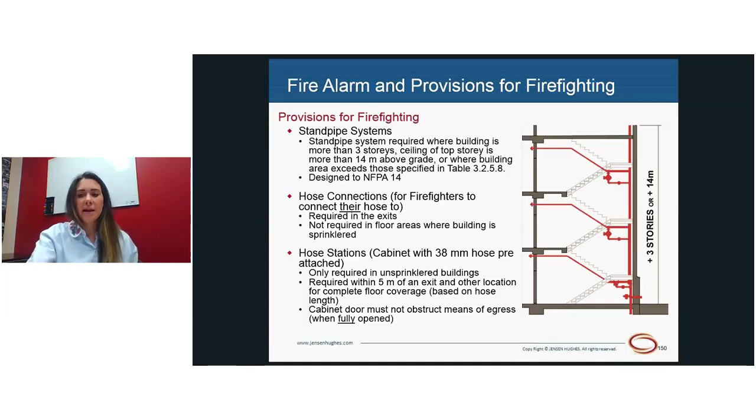But also to that point, when you're doing an alternative solution or a variance, one of the criteria you could use is proposing to meet the requirements of another code. In this case, when we do alternative solutions for standpipe systems in buildings in Ontario, we would be arguing that it complies with the National Building Code and the NFPA 14 guideline.

Okay, so now we're going to talk about commissioning. This is a relatively new term and topic, which is sparking a number of conversations in the building industry, especially those that install systems and test systems. This is related to integrated fire protection and life safety systems.

Essentially, it just states that where fire protection and life safety systems, and systems with fire protection and life safety functions, are integrated with each other, they shall be tested as a whole in conformance with CAN ULC S1001.

So typically, what used to be done, or what is a common occurrence, is that every sub-trade installs their system, so the fire alarm system, the mechanical guy installs the mechanical system. Once they've installed their system, they test their system, put a check mark in the box, and say that it operates accordingly. But no one ever thought about testing the fire alarm in conjunction with the mechanical system to make sure that they operate cohesively in the event of an emergency.

So the whole point of commissioning is to verify that these systems work together and there is proper operation and interrelationship between the systems.

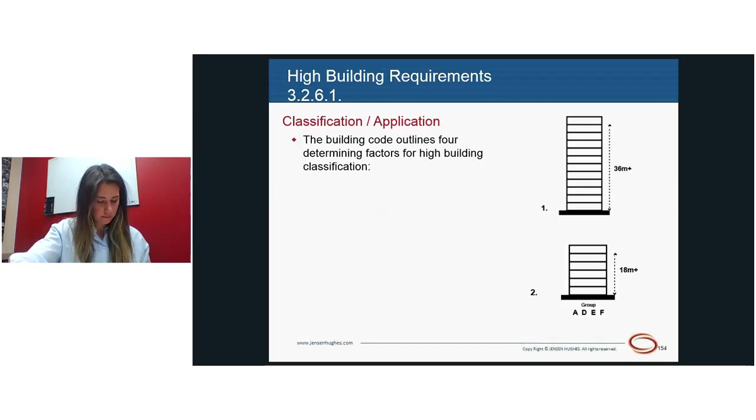Height of building: a building is considered a high building when the height is greater than 36 meters from grade to the floor level of the top story. This is applicable to assembly, office, mercantile, and industrial hazard buildings. That is measured from grade to the top of the floor of the highest floor level -- not the roof, not the ceiling, the floor level of the top floor.

Your second condition: high occupant loads on floor areas in buildings over 18 meters in height, measured between grade and the floor level of the top story. This is also applicable to A, D, E, and F, which is why it's lumped under one determining factor. So if we do the calculation under Sentence 1 subclause 2 and determine that this is a high building based on occupant load -- more than 18 plus meters between grade and the top of the floor of the top story -- then we are deemed a high building.

So in the other circumstances, on this one I put 5. If you have a group B occupancy with its top floor more than 18 meters above grade, it's deemed a high building.

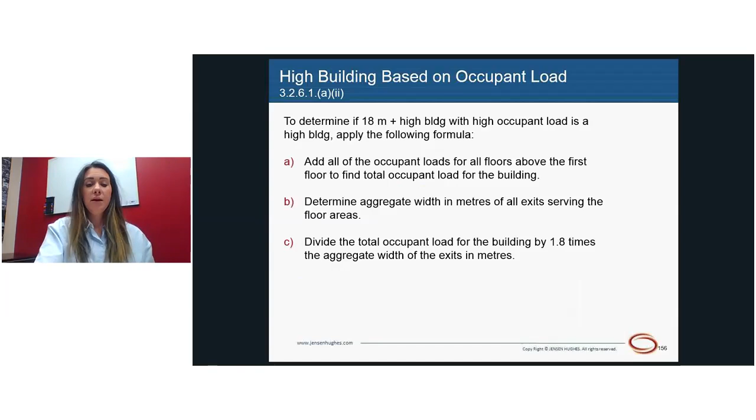So if you want to determine whether or not your building is a high building based on occupant load, you need to add up all the occupant loads for the floor levels above the 1st floor. You need to determine the aggregate width in meters of all exits serving each of the floor levels above the ground level. You need to divide the total occupant load for the building by 1.8 times the aggregate width of exits. And then if the resulting value is over 300, the building is deemed a high building.

So I've outlined some criteria here, and I've given you a starting point with the calculation that you would do. Your 5th and 6th floor have 2 exits at 1100 each. Your 3rd and 4th floor have 2 exits at 1200 millimeters each. And then your 2nd floor has 4 exits at 1200 millimeters each. Again, you don't include exits on the ground floor level.

I've incorporated the occupant load for each floor level, but in your accumulated occupant load, your 6th floor is 149 because there's no one above you. But then when I get to the 5th floor, I'm going to be adding 149 to 142 for the 5th floor because now I'm traveling from the 6th floor down to the 5th floor and picking up that occupant load. That occupant load is then accumulated with the 4th floor occupant load of 164 because we're all traveling down, picking up the occupant load on the 4th floor, and so on for the 3rd floor and the 2nd floor.

Then you're going to use that number in the calculation, and if any of these results end up over 300, that building is considered a high building.

If you go through and do these calculations on your own to make sure you're comfortable doing them, you will realize that the result is less than 300 for each of the floor levels, therefore this building would not be considered a high building.

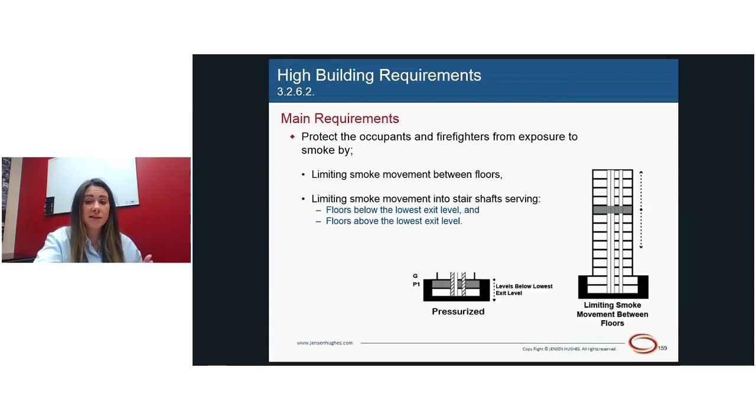When it comes to high buildings, you need to apply additional safety measures within that building. You need to limit smoke movement between floors, within stair shafts, below grade, above grade, and you also need to look at smoke movement within shafts serving your building.

So the main item is really protecting the exit stairs below the lowest exit level and exit stairs above the lowest exit level. Exit stairs serving levels above the lowest exit level require a vent or a door to the outdoors at or near the top of the stair shaft to release smoke.

Stair shafts serving stories below the lowest exit level are to be separated from the stair shaft serving stories above the lowest level. So you're going to have the below grade stairs separated from the above grade stairs. The stairs below the lowest exit level, separated from the above grade stair, are required to be pressurized.

If you have connected buildings, so links, those links are either going to be pressurized or you're going to have vestibules upon entering each end of the link that are pressurized. Or if this link were open to the exterior elements, then you would just have a fire separation on either side. Again, this is to protect smoke traveling from one building to another in the event of an emergency.

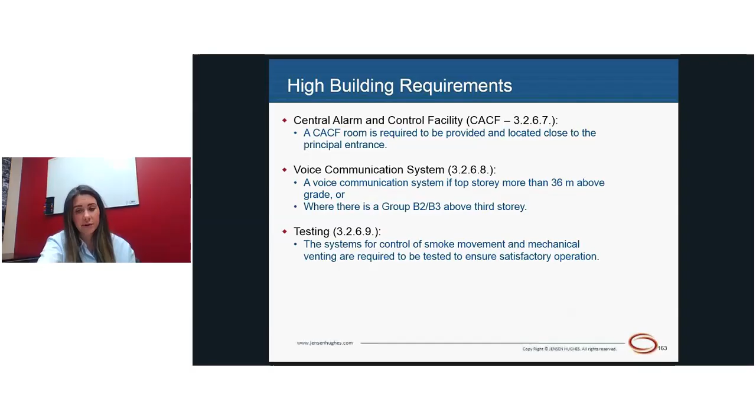Okay, now we're going to move into occupant load and exit capacity. This is the number of persons for which a building or part thereof is designed. Occupant load can provide answers to a number of things.

It can determine your exit width, it can determine your number of water closets, whether or not you require a fire alarm system, the type of emergency lighting and exit signage required, whether or not you're building a high building. It also dictates door swing. It really does tell you a lot about a building.

Under 3.1.17.1, which we can find on page 3-36, you have 2 options. Under sentence 2, it says if a floor area or part thereof has been designed for an occupant load other than that determined from table 3.1.17.1, a permanent sign indicating that occupant load shall be posted in a conspicuous location.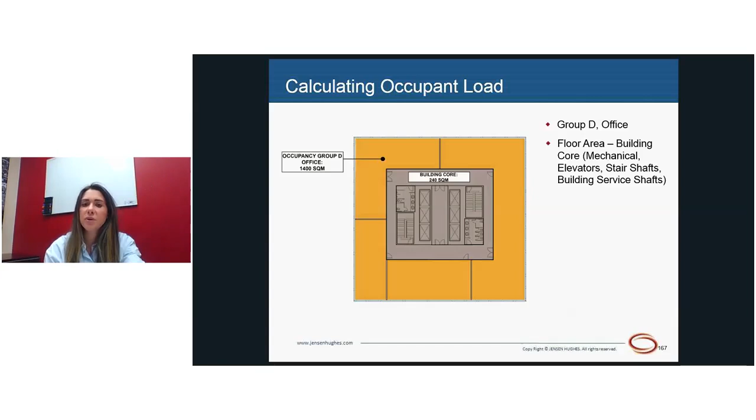So here's an example. We have a group D office space, we have a floor area of 1,400 square meters, and we have a building core of 240 square meters. The building core is essentially your mechanical elevators, your stair shafts, and your building service shafts. If you want clarity on this, just look up the definition of floor area to determine what you can subtract from that.

So you would take your floor area of 1,400 square meters and subtract your building core to get your occupied floor area, then divide that by the NBC factor found in table 3.1.17.1. In this case, 1,400 minus 240 equals 1,160 square meters. When we divide that by the 9.3 square meter NBC factor, found again in table 3.1.17.1 for business and personal service uses—not the personal service shops one, the offices one, which shows 9.3.

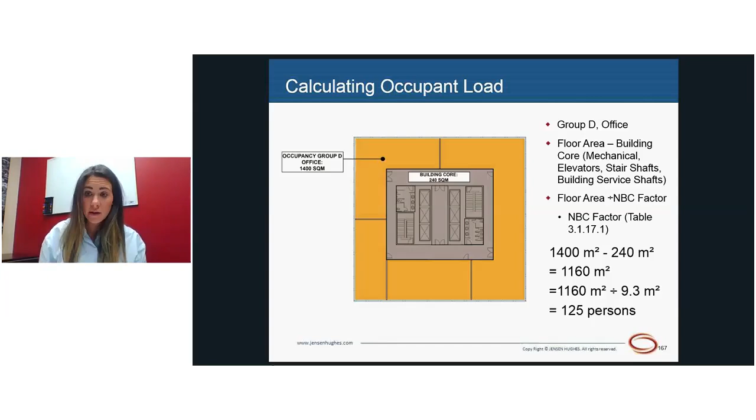When you divide 1,160 by 9.3, you get 124.7, so you're going to round up to 125.

So now that we have our occupant load calculated by the NBC factor of 125, we need to determine whether or not the exit capacity is sufficient to support that occupant load.

So when determining the minimum width of exits, you simply go to 3.4.3.2 and apply the NBC factor for exit width. You can divide it by 6.1 millimeters per person for ramps, doorways, and corridors. Typically you'll use this if it's an exit door exiting from the ground floor level. You'll use 8 millimeters per person if you know the design rise and run of the stairs. Otherwise, you'll use 9.2 millimeters for all stairs because that's the worst case scenario.

Rarely do we use 8 millimeters unless the client has given us the design criteria for the stair, or we've done a site visit and know the rise and run is 180 by 280, or we're provided with stair drawings and can check that ourselves. But for the most part, you use the worst case scenario.

Then you would apply 18.4 millimeters per person for anything serving a Group B or care occupancy. The most restrictive element determines maximum exit capacity. Any single exit cannot contribute more than 50% of the required exit capacity.

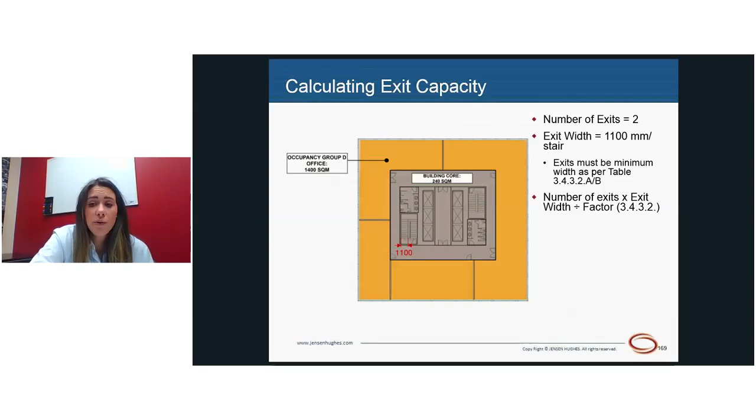So same floor area, served by 2 exits at 1100 millimeters each. We're going to again go with the most restrictive, which is 2 times 1100 millimeters divided by a factor of 9.2 millimeters per person, which gives us 239.1, I believe, when you calculate this. So you're going to round down, because you already have exit capacity there, and you can't accommodate that 0.1 of a person. So, occupant load rounds up, exit capacity rounds down.

Now we're going to calculate plumbing fixtures.

Water closets are to be provided assuming the occupant load is equally divided between males and females. Urinals are permitted to be substituted for two-thirds of the required water closets, and you need at least 1 lavatory for every 2 water closets.

As for design and location, the code stipulates that washrooms are required to be made available for all occupants of the building. However, washrooms need not be provided on the same floor level as the occupants they are intended to serve, provided that all occupants within the building have access to the washroom facilities. For example, in a large college, you could calculate all the water closets for the entire facility and lump them in the basement or in a bottom corner somewhere, and everyone could use them that way. However, that is not practical nor convenient. So you would take the total number of water closets and distribute them throughout the building to be more conveniently placed to serve the occupants.

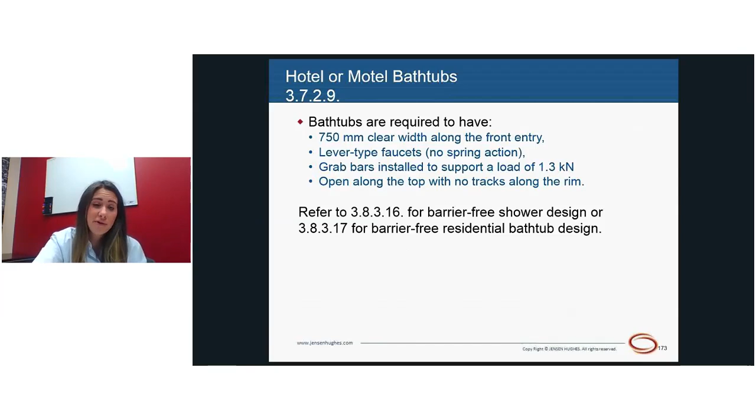Under 3.7.2.9 in the health requirements section, you'll notice there's design requirements for a bathtub. If there's a requirement that it has to be barrier-free, then you should also be referencing 3.8.3.16 to 3.8.3.17.

In the meantime, we're going to work on a water closet calculation. So we're going to flip to section 3.7, and we're going to look at table 3.7.2.2B, which is on page 3158, as displayed on the screen.

Now we're going to use the same floor area we calculated occupant load for - floor area divided by NBC factor. So again, same floor area: we take 1160 square meters, divide by 9.3 square meters, which equals 125 persons, because we round up. We divide that by 2, and again we get a decimal, so we round up, which gives us 63 male and 63 female.

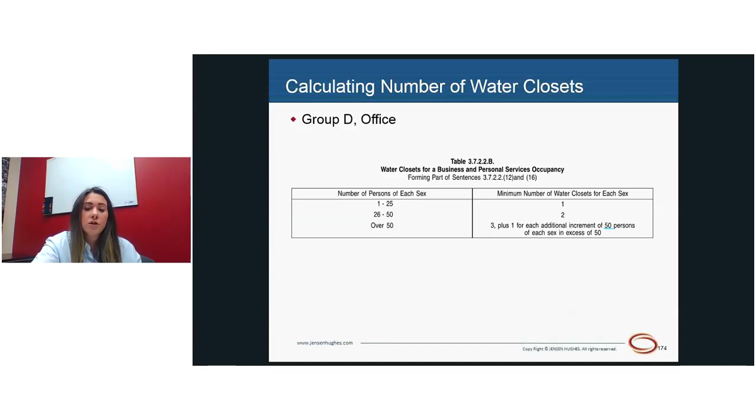So if we refer to our table here, we are over 50, which means we require 3, and then it reads plus 1 for each additional increment of 50 persons. Because we're only at 63, we don't need to add an additional one, since we're not at an additional increment of 50 yet. So that means we would require 3 male and 3 female water closets, of which 2/3 of those male water closets could be substituted for urinals, and we would need at least 2 lavatories per washroom.

I do want to confirm one item if it wasn't clear, for the exit capacity and occupant load: when we determined our exit capacity of 239 persons, because it is greater than the calculated 125 persons, the exit capacity is sufficient to support the occupant load in accordance with the code. Now, if you wanted to have an occupant load greater than 125 - say your client wants to put 200 people here - you would be permitted to, because your exit capacity is still 239. So you could actually post your exit capacity of 239 rather than your anticipated occupant load of 200. That reverts back to sentence 3.1.17.1, sentence 2, which permits you to have a different occupant load than what you calculate using the NBC factor, provided you post a sign.

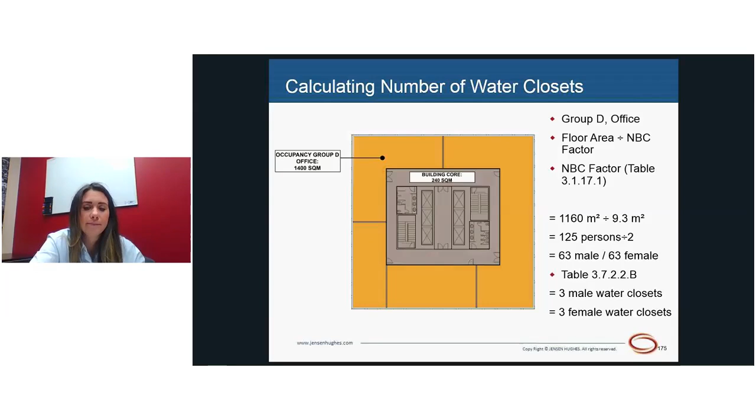Now we're going to get into protection of floor areas with a barrier-free path of travel - in other words, areas of refuge. Section 3.8 provides guidance toward designing barrier-free accessibility through a building, and also addresses the well-being and comfort of persons with disabilities by providing design criteria to suit people with wheelchairs, cognitive disabilities, sensory disabilities, and vision impairments as well. Nowhere in section 3.8, though, does it address the safety of individuals with varying levels of abilities - that information can only be found in Article 3.3.1.7.

There's various approaches to complying with protection of floor areas. The major one is that protection of floor areas is deemed to be provided if your building is sprinklered.

If I was a wheelchair user or had a disablement or impairment that prevented me from exiting the building like an able-bodied person could in an emergency, the sprinkler system is intended to protect me. I had a slight giggle there because I think it's absolutely ridiculous that a sprinkler system is said to protect an individual with a disability when everybody else is evacuating the building.

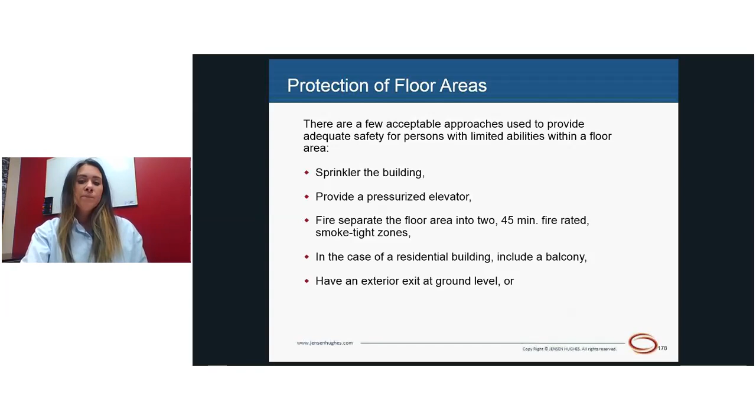In the case of a residential building, you can have a balcony provided off of your dwelling unit, and then just provide exit options from the ground level.

This is getting into the last component of our seminar today, and that is barrier-free design and accessibility. This discussion will take place using section 3.8, starting on page 3161.

Now, entrances - not less than 50% of entrances into a building are required to be designed barrier-free. Round up if not a whole number. Walkways and bridges that connect barrier-free stories must also be barrier-free.

A barrier-free path of travel is required from an accessible parking space to a designated barrier-free entrance, to and throughout the normally occupied entrance story, and to and throughout all normally occupied floor areas served by an elevating device. The funny thing is, if you have a 2 or 3 story building that is exempt from barrier-free requirements...

On the 2nd and 3rd floor, the entrance story is required to be barrier-free, then you voluntarily provide an elevator to the 2nd and 3rd floor. That 2nd and 3rd floor are now subject to the requirements of section 3.8, whether or not you voluntarily provided it.

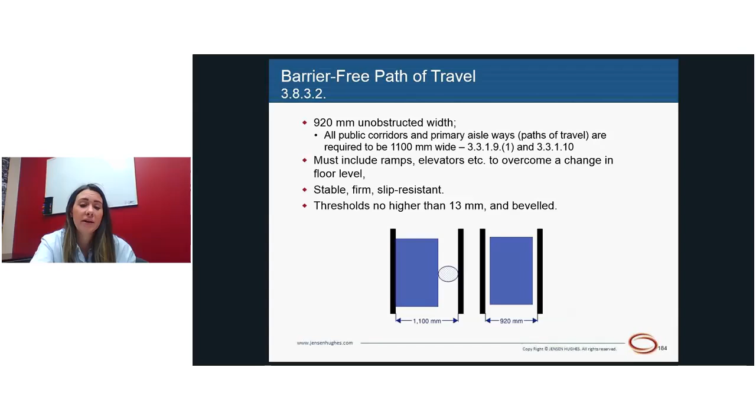A barrier-free path of travel needs to include ramps and elevators to overcome changes in elevation. It needs to be stable, firm, slip resistant, and thresholds must be no higher than 13 millimeters and beveled. If you've tested a wheelchair yourself, you'll know 13 millimeter thresholds can be difficult to maneuver over, so it's recommended you keep them level or flush with the floor as much as possible.

In a barrier-free path of travel, you require lay-by space when the travel distance or path of travel is longer than 30 meters. That lay-by space has to be not less than 1.5 meters by 1.5 meters and is required at 30-meter intervals.

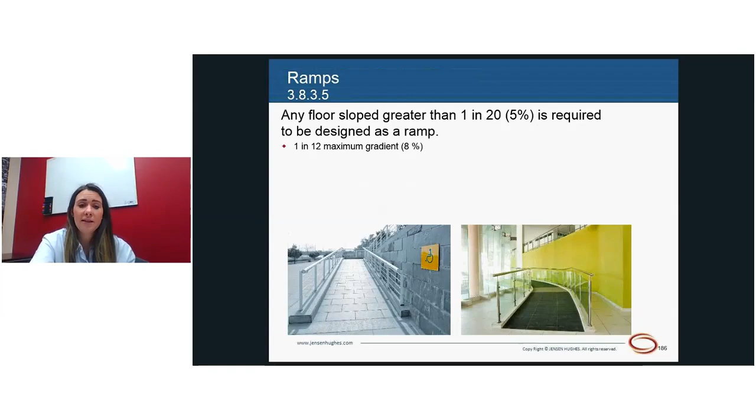When you have a ramp in a barrier-free path of travel, it's required when the floor is sloped greater than 1 in 20. It needs an adequate landing at the top and bottom of the ramp, and must be served by handrails on both sides and guards on both sides. All of this design criteria can be found in 3.8.3.5.

Accessibility signage displaying the international symbol of accessibility must be provided to identify barrier-free entrances, accessible washrooms, accessible showers, and accessible elevators. Typically it's the elevator that conforms with CAN CSA B44, Appendix E of the Safety Codes for elevators standard, if I recall correctly.

Accessible parking facilities and facilities for persons with hearing disabilities also need this. Any accessible facility should be provided with accessibility signage or directional signage indicating where that accessible facility is.

Controls for the operation of building services or safety devices intended to be operable by building occupants are required to be operable with one hand and located between 400 millimeters and 1200 millimeters above the finished floor level.

When you get into doors and doorways, a door has to have a minimum clear width of 800 millimeters, measured between the inner face of the door and the inner stop of the frame, or the innermost latch—whatever closest component within a door, that is your clear width.

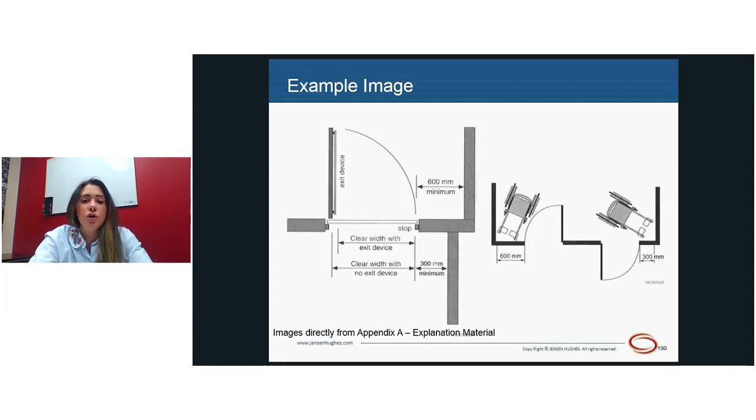Assembly seating: when designing a theater or lecture hall, you need to take into consideration designated wheelchair seating. It needs to be part of the seating plan, cannot obstruct an egress path of travel, and must adjoin a barrier-free path of travel. You might even have to take into consideration an assistive listening device or system, depending on the size of the space.

Typically you'll always have at least two designated wheelchair spaces, and those spaces need to be side by side, usually with companion seats on either side. They need to form part of a barrier-free path of travel and can't obstruct an egress path of travel. You also want to ensure a choice of viewing—if you have more than one tier, you'll have to provide a barrier-free path of travel to more than one tier.

Washrooms are required to be barrier-free. Where water closets are required by subsection 3.7.2, per the health requirements, at least one barrier-free water closet must be provided in the entrance story, unless a barrier-free path of travel is provided to barrier-free water closets elsewhere in the building, or they're for dwelling units only.

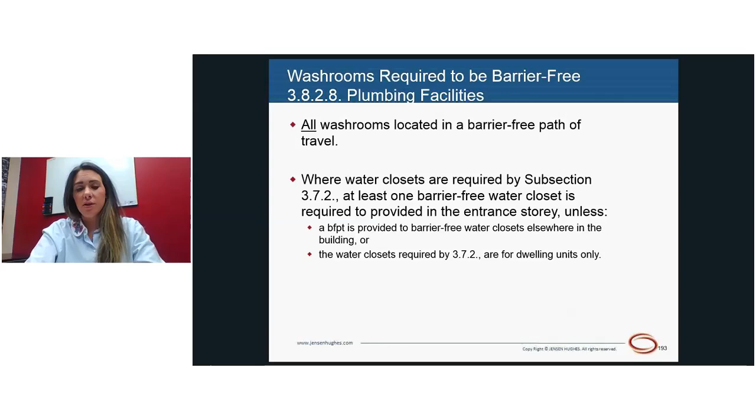Where alterations are made to an existing facility, universal washrooms are permitted in lieu of multi-stall washrooms. Washrooms that are not required to be barrier-free are exempted when located in residential suites or care suites.

Other barrier-free washrooms are exempted if located within 45 meters of another washroom. So if I have a universal washroom within 45 meters of another washroom, those washrooms would not have to be barrier-free. Or they're located in an individual suite serving a group B, E, or F less than 500 square meters, completely separate from and without access to the remainder of the building.

All of your barrier-free washroom design criteria and requirements are outlined in Articles 3.8.3.11 all the way to 3.8.3.17. So during your exam, if you're asked for any design criteria, it should be simple enough to just look it up within those articles.

A universal washroom needs a minimum 1500 millimeter turning circle and a 900 millimeter wide transfer space. You need a grab bar adjacent to the water closet, as well as to the rear of it. The water closet has to be positioned so a wheelchair user can do a lateral transfer onto the seat. A toilet paper dispenser should be in close proximity to the toilet, as well as a hand paper towel dispenser and soap dispenser near the lavatory.

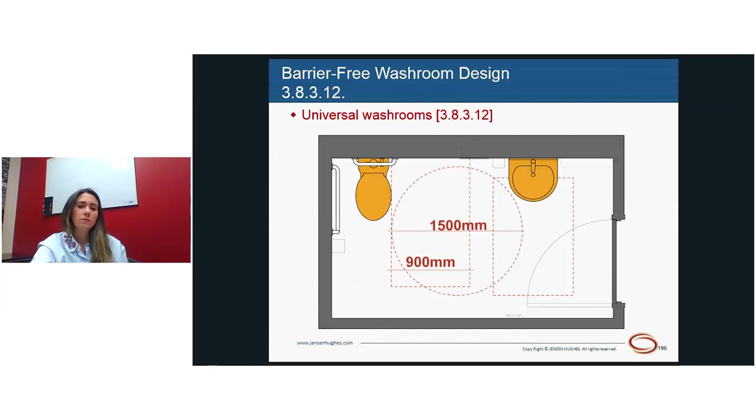Other items discussed in the accessibility section include counters, shelves or counters for telephones, as well as drinking fountains. The first one, counters under 3.8.3.19, applies to public service counters, including the provision of knee spaces between or underneath desks. All of that design criteria can be found under 3.8.3.19.

Last but not least, I'm going to talk about existing buildings and how the NBC applies to them. The NBC applies to the design, construction, and occupancy of new buildings, and to the alteration, reconstruction, demolition, removal, relocation, and occupancy of all existing buildings.

First and foremost, the building code is not a retroactive document. So if I'm not doing alterations or renovations, I don't have to comply with the code. That's when you would have to comply with the fire code instead, because that is a retroactive document meant to assure the safety of your building is being maintained. However, the building code is not applicable because it's not retroactive.

Once you change, renovate, alter, or expand something in your building, that is when you must implement and comply with the code. If you can't comply, you need to justify that it is not feasible for your renovation or alteration to meet the literal application of the code, but you would still need to try to meet the code to the best extent possible. You would have to justify that to the authority having jurisdiction, and they would have to approve it.